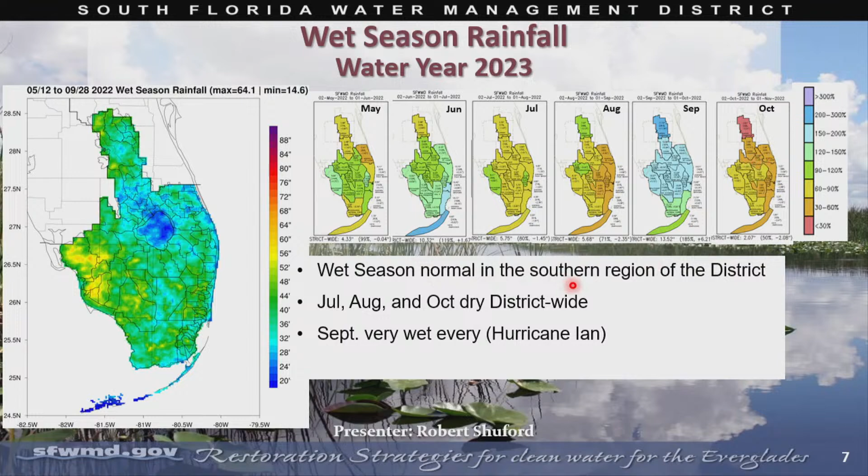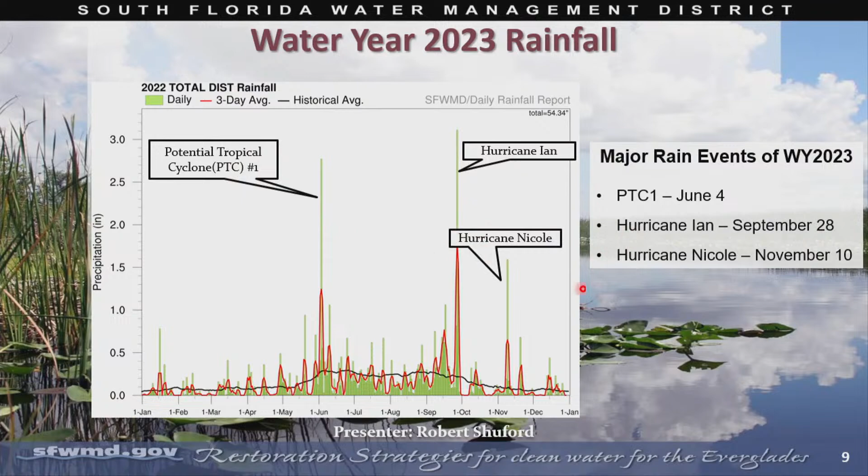All right, so we've seen the rainfall and talked a little bit about the storms. Let's look at how that actually impacts the system. The next 2 slides look at the marshes north of the EAA and south of the EAA. So we'll start with Lake Okeechobee. In this graph and the next, you'll see 3 boxes representing the dry season, wet season, and dry season of the period we're discussing.

As we start the dry season of 2022, Lake Okeechobee stage was near the intermediate band. Going into dry season, we have this gradual decline until right after the start of wet season. In other words, we had a late wet season that started around the 16th of May. The system responded a few weeks later with potential tropical cyclone 1. We got rains that gave us a little reversal, but it was a modest response that continued until September.

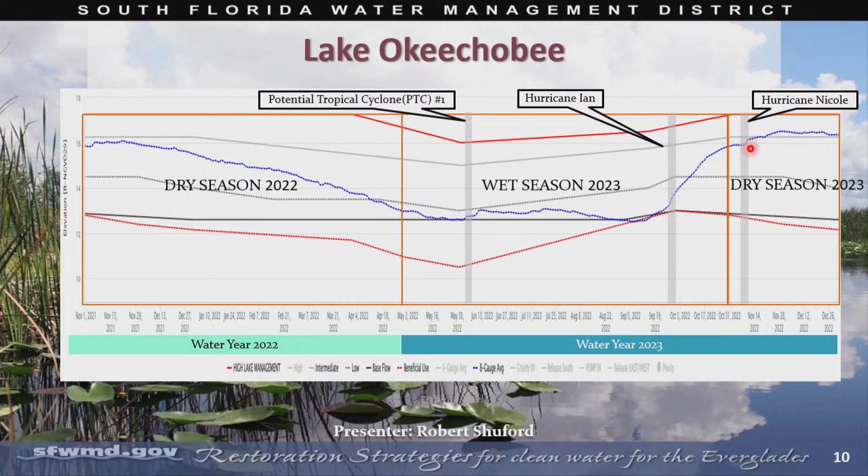Now, the EAA is bounded, like I said, on the north by Lake Okeechobee, south is 3A, but to the east are Conservation Area 1, which is the Loxahatchee National Wildlife Refuge, and Conservation Area 2A. So this slide, I'm not going to spend a lot of time on it, but it's basically just to show that there was a similar pattern. I didn't put the seasonal breakdown, but a similar pattern. We get rains, we get increases, and that's the story on this one.

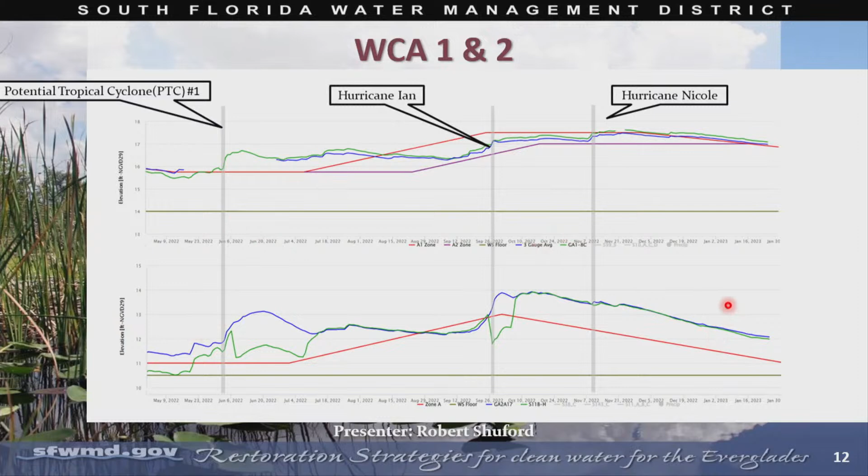All right, so we've looked at rain. We've kind of looked at how the system responds to the rain. Now we're going to look at seasonal inflows to the STAs. So here we have 3 seasons: dry season 22, wet season 23, and dry season 2023. The blue bars are runoff to the STAs, and the yellow bars are lake releases or regulatory releases to the STAs. And the rainfall is located at the bottom of the graph, and this represents basin rainfall for the region.

What we see is STAs received about 255,000 acre-feet of inflows during the dry season of 2022. That volume was partitioned into just under 210,000 acre-feet of runoff and about 47,000 acre-feet of lake releases. And this all is kind of a response in part to almost 10 inches of rain that was experienced in that dry season period.

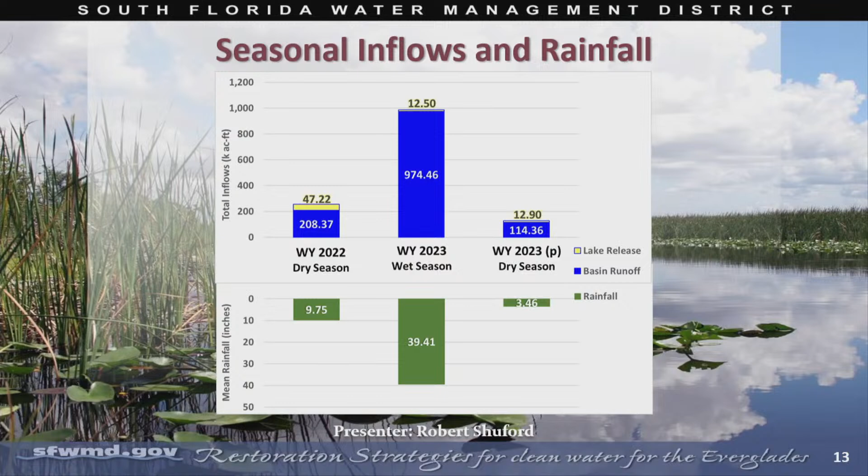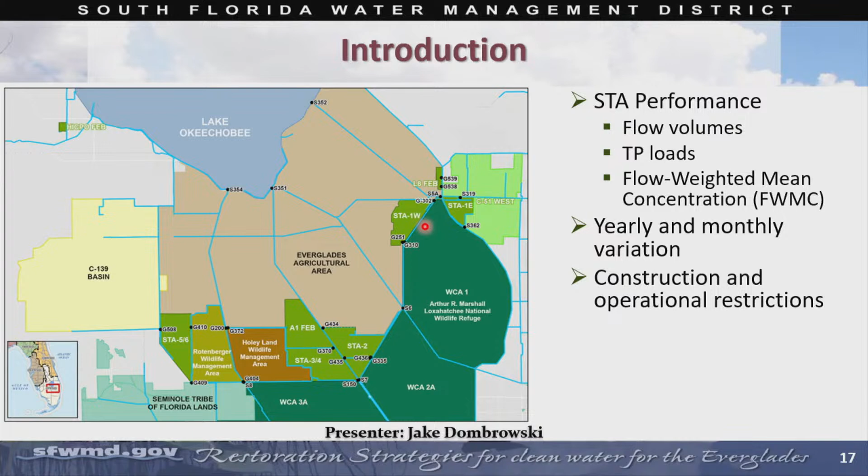So for performance, we're going to be looking at flow volumes, TP loads, and the flow weighted mean concentration. So I might just refer to concentration at a few points, but I'm always referring back to the flow weighted mean. So we're going to look at yearly and monthly variation, as well as construction and other operational restrictions.

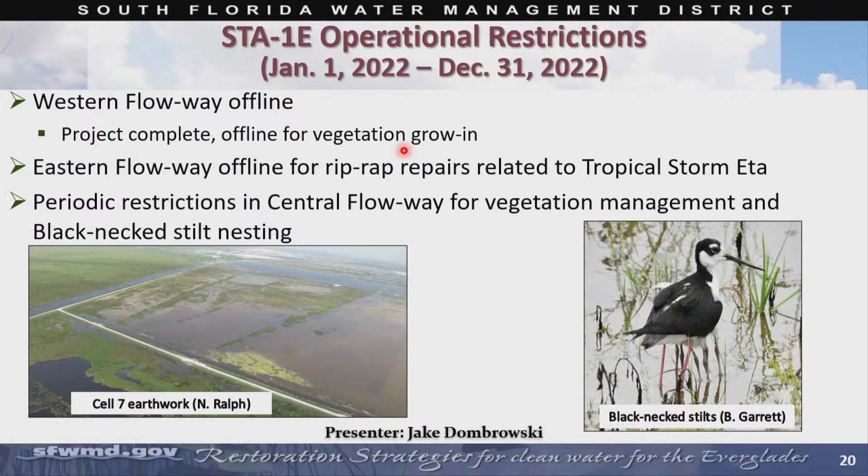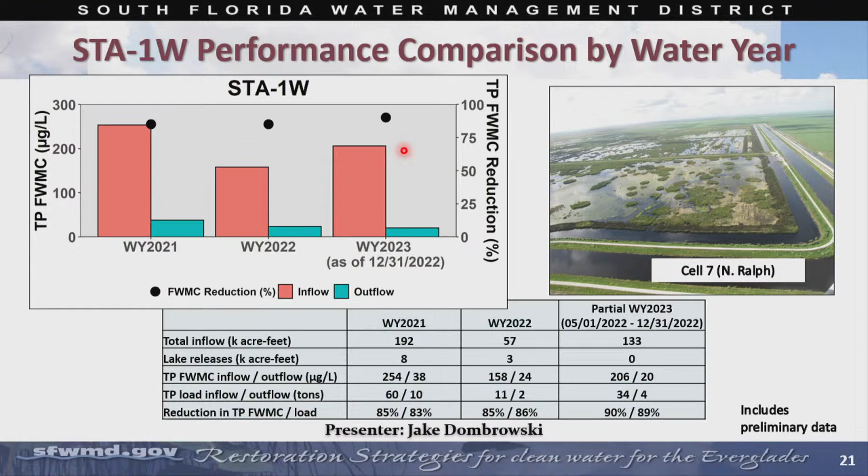Looking at the monthly trends, so far in water year 23, 1 West has received higher inflow volumes. This is related to a couple things. There's been a few refurbishment projects that have recently wrapped up in 1 West, improving its capacity to take flows. And then all the work ongoing in STA1 East has led to water being channeled towards 1 West instead.

One last thing to highlight here for the monthly trends is the outflow concentration in water year 23. It's been low and stable with minimal impact from the storm season, thanks to the L8 FEB.

For operational restrictions, 1 West, all the flowways were online this year. However, there were periodic restrictions in each of them. Those were refurbishment earthwork projects that occurred in the northern, western, and eastern flowways. These were primarily levee reconfigurations.

The photo on the bottom right here highlights this L-shaped open water area, which is where a levee used to be, and it's currently being revegetated, while the levee was moved elsewhere. There was also construction related to expansion number 2 in cell 8, and we had black-necked stilts nesting in the northern and eastern flowway.

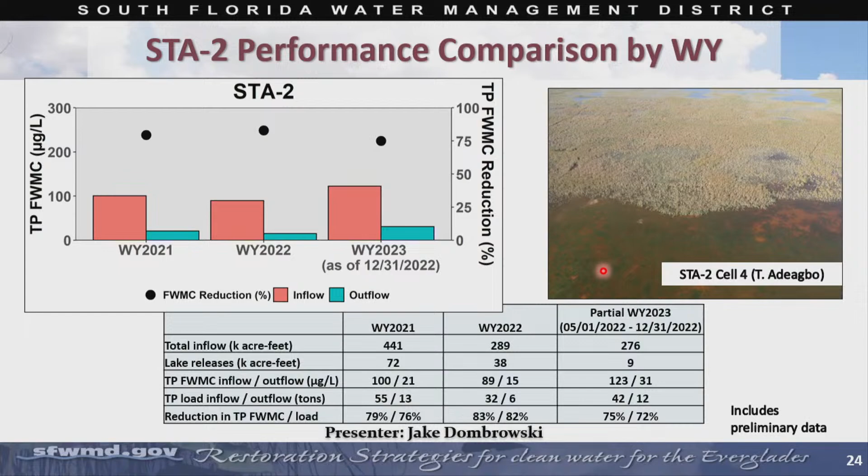For STA2, STA2 has had relatively similar inflow volumes compared to last year, or at least it's on track to be about the same as last year. The inflow concentrations and the outflow concentrations have been higher this year, especially for the inflows, and I'm going to touch on that in the upcoming slides. The percent reduction for STA2 has been down, while the amount of TP load retained within the STA has been relatively similar to past years.

Other thing to highlight here, the concentrations at the in and out. In 23, we've had these higher inflow concentrations, and then we've seen a slight uptick in the outflow concentration as well. And that's related to a couple of factors. I'm going to transition to the next slide.

This work that was going on in Flowway 2 required very low stages for the construction, which impacted Flowway 1. Flowway 1's directly adjacent, and a lot of the stages there were reduced while the construction was happening. This actually caused dry out for a number of months this past spring. So that combined effect of reduced capacity in Flowway 2 and dry out in Flowway 1 are likely big factors for the uptick in the outflow concentration.

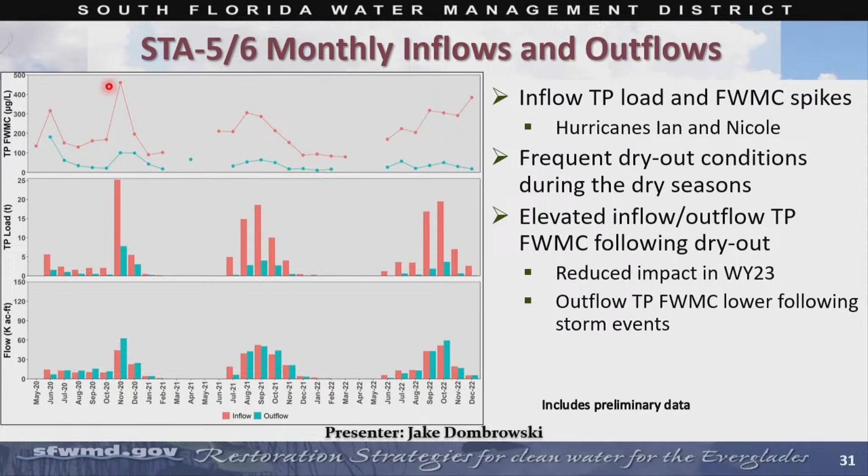In terms of operational restrictions, there really hasn't been much out in 5/6. Flowway 4 was offline for a portion of time for vegetation management. Otherwise, all other flowways were operational. So I wanted to highlight a few other things here. A number of years ago, we had some earthwork that was done in flowways 2 and 3 to improve some of the inflow treatment areas there.

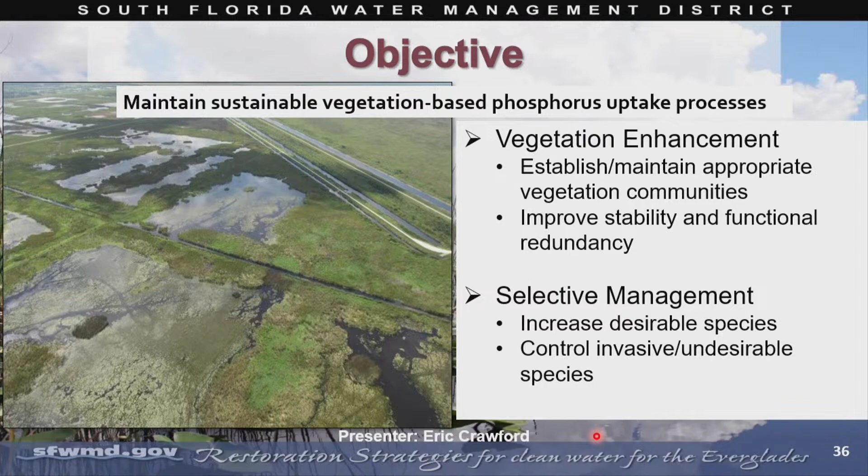So the function of the vegetation in the STAs, the first function of the emergent vegetation is to stabilize the soils. Without the vegetation there, the soils move, and we get erosion, and we just get immediate gullying and short circuiting. So stabilizing the soils, to us, is the first function. It's what has to happen before you can move into the rest.

So once we get the soil stabilized, then the plants serve to break up the flows, disperse the energy, which can cause a decrease in turbidity and increase sedimentation. We're dropping the particulates out, and those emergent plants are creating litter, and you get a lot of microbial litter and phosphorus uptake capability on the litter.

The submerged vegetation, most of the species provide little soil stability, but some do. Primarily, they provide a route of water column and phosphorus uptake. And they also provide a substrate for periphyton to grow on, which can do a lot of phosphorus uptake as well.

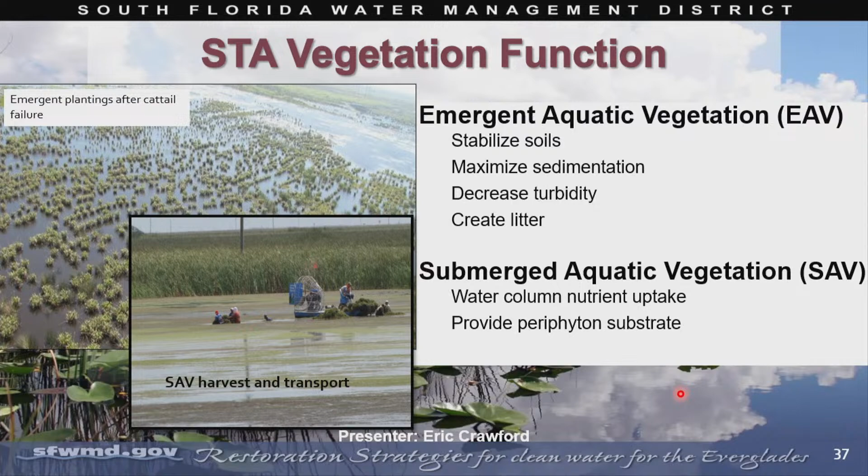So what we want is a cattail-dominated inflow cell. And to get good cattail domination, especially in a cell or a part of a cell with a lot of organic soils, you need the bulrush and the deeper rooted plants to stabilize the cattail. Cattail grows quickly, makes a lot of litter, it does its job really well.

Cattail is not stable, doesn't root deeply, and can have a lot of problems with water level fluctuations, with it separating from the soil. It's very buoyant. So we mix in deeper rooted plants. So when you see a cattail stand like that, even if you don't see the other plants, because they may be 2, 3, 5% of the total population, they're doing their job and helping to hold the cattail down.

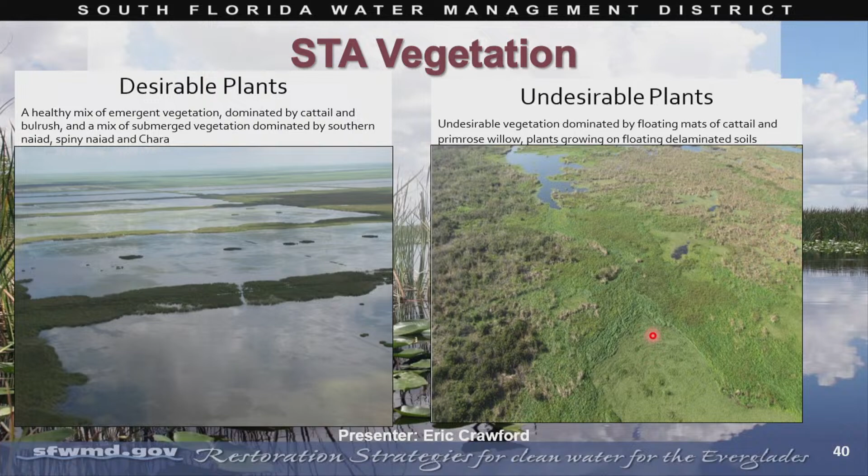And so the wind tends to be more powerful in the motion of these floating wetlands than the water flows do. So it's hard to predict where they're gonna go and how they're gonna move. So it's easier to remove them instead of try to stabilize them. But when we can stabilize them, we do, because removal is expensive, and then we have an empty zone. And then we have to plant the empty zone.

Planting looks like that. We have crews of 15 planters, and we'll typically have 2 alligator removal watchers with each crew, keeping them protected. And they spend a day harvesting plants. We grow our own plants, so we grow harvest sites. We pick species that we like. We pick communities that we like to grow differently. And so they'll spend a day harvesting and then a day planting. Most of our crews do about 5,000 plants a day.

And this area is the same area that I showed in the previous slide, with all the floating soils and the floating wetlands and the invasive plants. It's been cleaned out. We removed everything, sank all the materials, and then the crew is going in and planting. In this case, it's giant bulrush.

It's a really organic zone, and so we needed a deep rooting plant to go in and stabilize it. There's enough remnant, well-rooted, strong cattail in the area that hopefully once the bulrush stabilizes those soils, the cattail can recolonize.

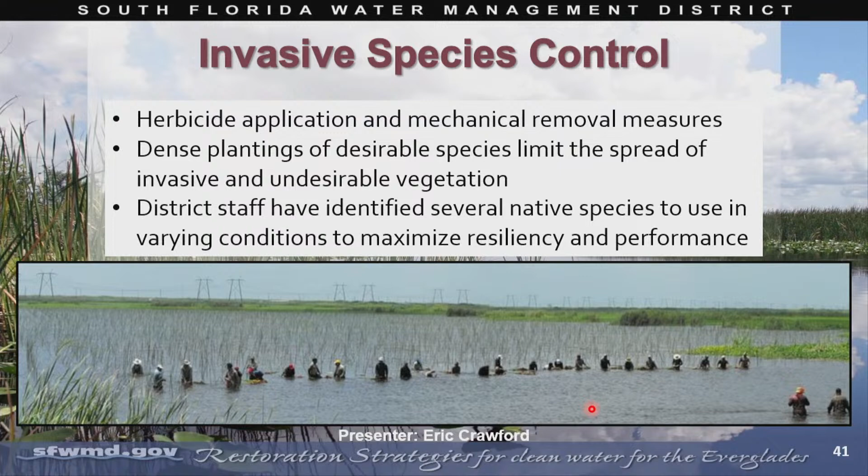Floating aquatic plants are a big problem, and when the floating veg moves in, it comes in on the water as we have our flows. So when you have a hurricane flow, you bring in a lot of floating invasive plants. When you have a projected hurricane or storm, we move in a lot of floating invasive plants. You don't have to have the storm to get the plants, because surrounding landowners and the farmers will drain their fields in anticipation of the storm, which causes a flow.

So we need to protect the plants in the STAs from these floating plants. When they move, especially in large rafts, they can come in 15, 20 to 100 acres at a time, and they're mobile. And when they go over the emergent plants, they can knock cattail down, and when they go over the submerged plants, they can uproot it, or they can just shade it out and kill it. So removing the mobile FAV is our biggest priority. It's what we spend the most of our time doing, chasing it, looking for it, and getting crews out after it.

In attempts to remediate the effects of the floating aquatic vegetation, we plant dense emergent strips in the inflow regions. Sometimes we can shape them based on the underlying geology, because the cells are not all flat and level. So we plant herbicide-resistant and strong, well-rooted, flow-resistant plants in the inflow areas, and they can hold back and capture some of that FAV and hold it till we can treat it. So it gives us a little buffer in time.

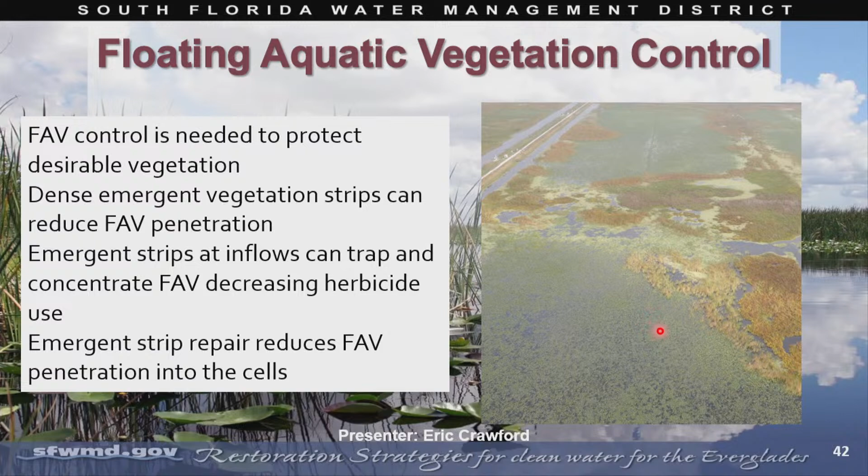So to be able to do these processes, we need to watch and monitor the health of the vegetation. Every cell gets inspected from the ground weekly and gets inspected from the air monthly. And typically we'll get a boat in it when something is seen, or we'll go out and walk it. Most of the emergent cells you can go out on foot and do inspections. We work with the water managers when we have areas where we see there's been a lot of erosion or channeling or flow, and when there has to be a planting done, they can help reduce flow rates so that we can get the plantings in and get them rooted and ready for flow again.

To proactively manage the vegetation, it typically just involves increasing the cover and health of the desired species. We tend to pick the weakest areas first, and the season decides the site, the soil, the species. Obviously in the dry season, we will work in deeper areas. Wet season, we'll work in shallower areas. Dry season, we work the inflow regions where there's going to be less flow impact on the new plants. And in the wet season, when flows are coming, we move downstream and plant in more protected areas. So we move around the crews as conditions allow.

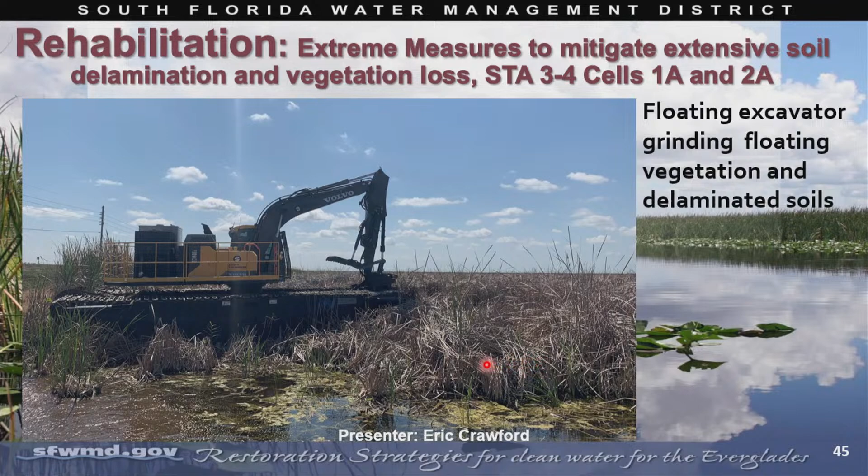So this is where we did that, and in 1A was the first time we had to do the extreme grinding. And I've got a little video here that'll show, you can see the dates up in the corner. So this is 2017. STA-3/4 has a number of short circuits cut in at each structure. This is a large slough that comes down. It's a little bit deeper area with a hard packed marl bottom with a thin layer of floating peat on it. And it flows all the way to the outflow here, and then it splits and does the same over here.

This is cell 2B, which is a beautiful, healthy, productive cell with great performance. But at one point in this project, we actually had the bright green here. I played with the imagery to make different species show, and in these settings, it makes the water lettuce and the floating vegetation really bright. And I'll just start the video now.

So you can see the progression. Maybe. Should go.

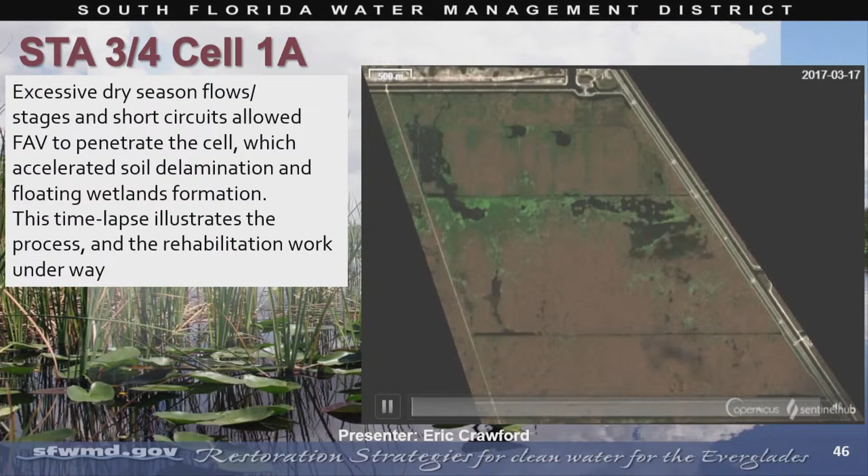All right, so in addition to rehabbing the emergent vegetation, we rehab the SAV. That's in some ways easier and in some ways harder. We have to go out into deeper areas. They're collected by hand and then stacked on an airboat, brought to the shore, loaded on a trailer, moved to the target cell. We'll do it within a single cell when possible.

But when a cell has had serious SAV losses, we try to bring in multiple species and multiple communities of the same species from different locations. And then we try to harvest from the most diverse areas to bring it in.

And when we see dense chara beds, the chara is a beautiful performer, but its senescence is not predictable. And when chara has been healthy for a long time and the beds die out, it's very difficult to get anything to grow in the soils in the floc that's left behind by a productive, healthy chara bed. We found some species that can grow in those conditions, and so we tend to inoculate them into healthy chara beds just to prepare for the next successional event.

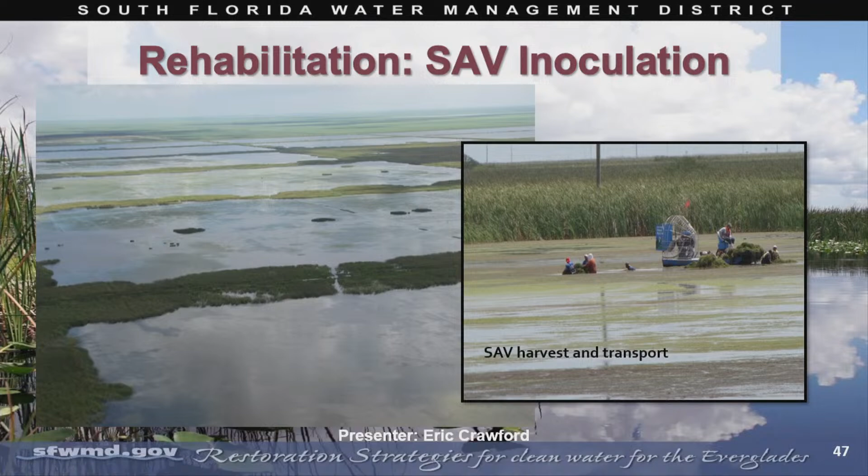So in addition to moving plants around and mixing species and adjusting the communities, we've found that SAV by itself is not very stable, and it's sensitive to a lot of environmental perturbations, to wind, to flows, and to wildlife. So we compartmentalize the SAV with emergent vegetation strips, and sometimes we mix emergent vegetation right in with the SAV.

That provides some stability. The roots of the emergent plants hold the SAV, distribute, stop the flows, and protect it from storm events. And when sized properly, a storm event can come over and the SAV will persist. Without the emergents, sometimes the SAV beds can roll over and they can get blown to the sides, and it takes a long time to recover from that. So we want to avoid that when possible by trying to manage the amount of EAV in the SAV beds or the size of the SAV beds.

This is STA-2, cell 3. Had a lot of SAV die-off, had a lot of issues with damage to SAV. The compartments were really large. They were really affected by wind and storm actions. So we had to go into cell 3, and we've planted, at this point, I think it's like 12 miles or 13 miles of emergent vegetation strips of giant bulrush, closed off a number of short circuits.

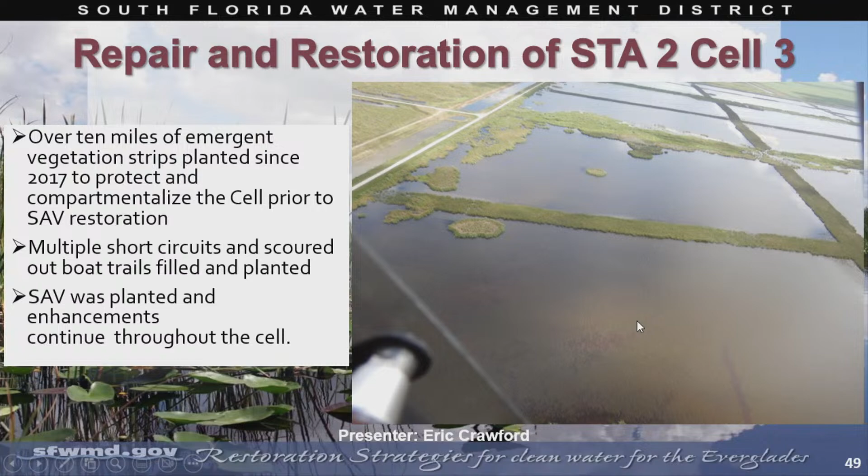One of the methods that we've come up with to keep our EAV plants healthy, especially when they have to be moved between cells, is as the plants are bundled and collected and harvested from our harvest sites, we wrap the root balls in SAV. So all emergent plantings are moved with an SAV planting as well. So hopefully that's not a lot, but it just takes a few plants to get going, really, to spread throughout the compartment.

And when you see the big white areas at the downstream end of a cell, that's not necessarily something bad. A lot of times that means the Chara was growing so well that it really topped out, and then we may have stage changes. Even in the wet season, the Chara can just fill up. If we have a storm event, stages come up a foot or so, the Chara will follow the water surface up, and then when the water goes back down to target, the top of the Chara gets bleached off.

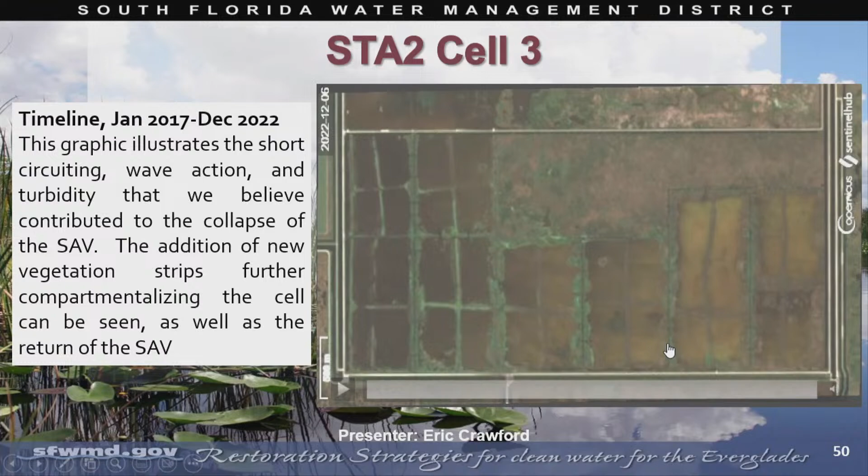And so a lot of times on the imagery, you'll see these white zones that look bad, but it's just a thin layer of dead Chara sitting on top of a nice bed, and they typically disappear by the next storm. And that'll wind it up.

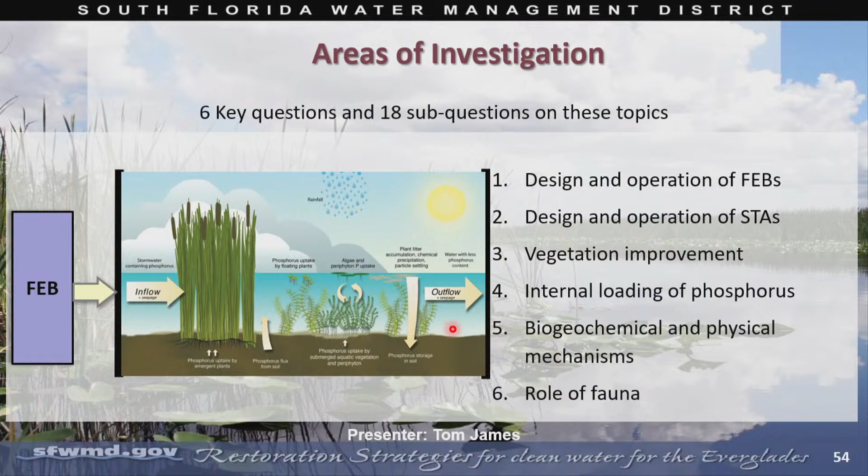And all we're trying to do is understand how the phosphorus is removed and retained within these areas, going to the design and operation of FEBs, STAs, how to improve the vegetation and to maintain it, and looking at the internal loadings from the soils into the water column, and also all the biogeochemical and physical mechanisms that retain the phosphorus within the soils and keep it from flowing out. And finally, the role of fauna, which has been an interesting aspect of this whole study.

So I'm not going into the completed studies to save some time. These have been presented in past years, but I do want to mention a couple of things. One is that the studies have long names, and because of that, development of operational guidance for flow equalization basin and STA regional operation, we call this the operation study. We have nicknames for them, so I'm going to be presenting the nicknames.

I do want to point out the PSTA study. This is a study where we took a 100-acre cell, we removed the muck from the bottom basically to lime rock, and it has been in place and operational for 15 years. And in those 15 years, the mean discharge of phosphorus has been less than or equal to 13 parts per billion, which reaches our mandated water quality effluent limits.

So again, there's some other studies. These are additional studies that were done recently, or studies completed. But I do want to mention the studies completed in the past year. We have the soil amendment, or soil management study, which had 2 aspects. One was to look at the potential for applying amendments to the soils, which, based on the literature review and estimates, is very expensive because of the broad areas of the STAs that would have to be amended. And there's uncertain effects downstream.

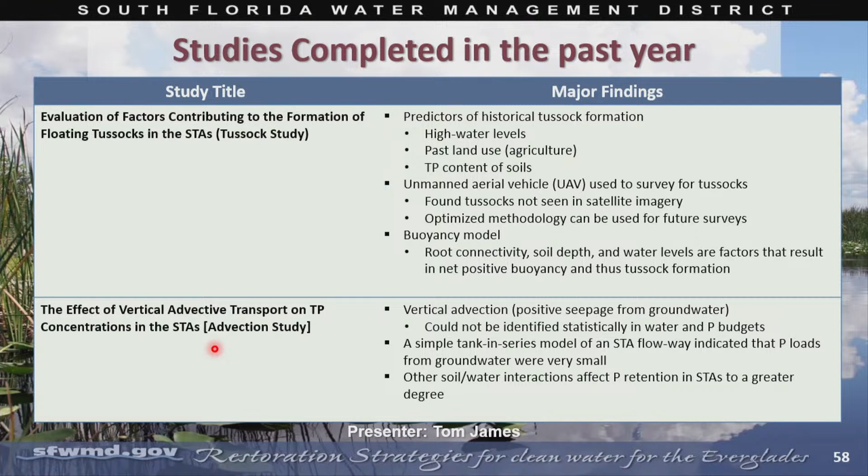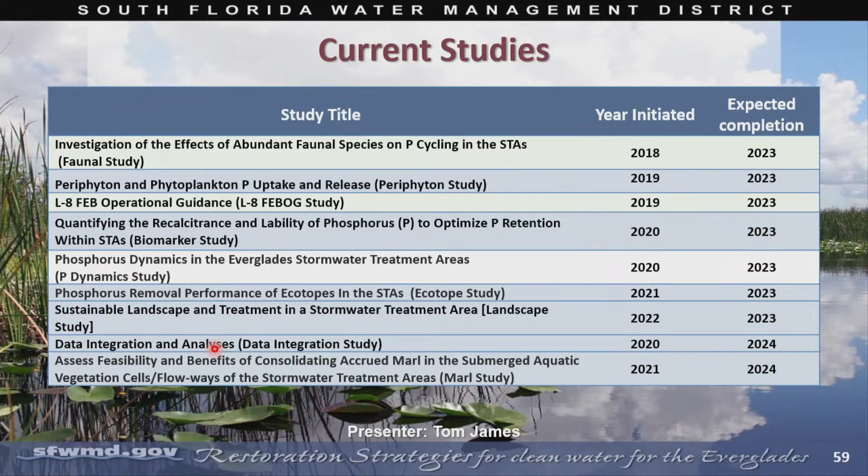So I wanted to real quickly go over the current studies that we have, these 9 studies, which is the bulk of this presentation. Because of time, I probably won't go through every aspect of them, but I will point out some of the highlights, either objectives, results, or status, or just talk about the pictures. And this one, I do want to talk about the picture.

In the fauna study, there are a couple of things that we do know. We've got a lot of fish, which was the focus of most of the study, and those fish can affect the phosphorus in the water column either through excretion or through bioturbation, where they stir up the soils. And we do know that the large fish are the ones that really stir up the soils. It's basically species specific, and there are certain species, such as the sailfin catfish, that are very good at stirring up soils.

And this particular photo shows these enclosures, which have 1, 2, or 0 fish. And you can see that there's quite a difference in the water quality when you have 1 fish, 2 fish, or no fish. And so we do know that they do have an effect.

However, because the small fish are at a greater density and they also produce a lot more excretion, they actually have more effect on the water quality in the STAs than the bioturbation from the larger fish, which tends to be very specific to particular areas. So we can fix the bioturbation essentially by selective fishing in different areas, I think, is one idea. But in terms of the small fish, well, we'll have to figure that out.

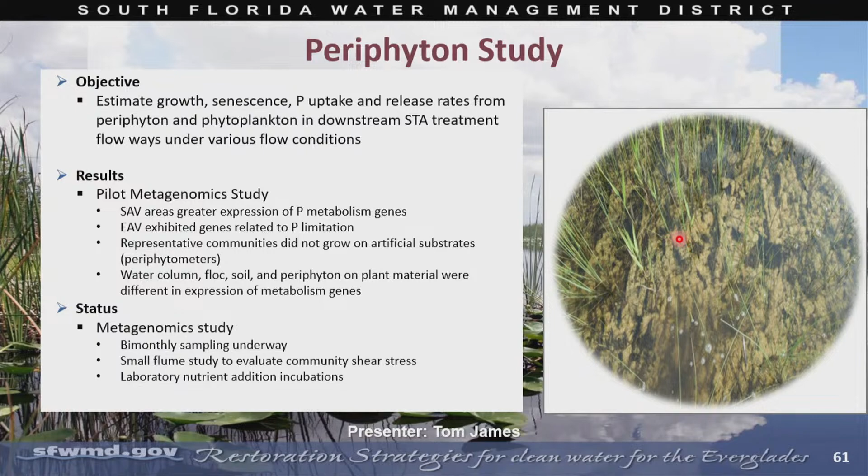In water year 2018 in the L8 FEB, the discharge concentration of phosphorus was greater than what came in. So this started this particular study, which was to ask the question, where is that phosphorus coming from? So first of all, we looked at groundwater and we looked at runoff, and neither of those had significant impact. Then we looked at the large inflows that do occur because, again, this is what the FEBs do. They take in large inflows to essentially reduce the impact on the STAs during storms.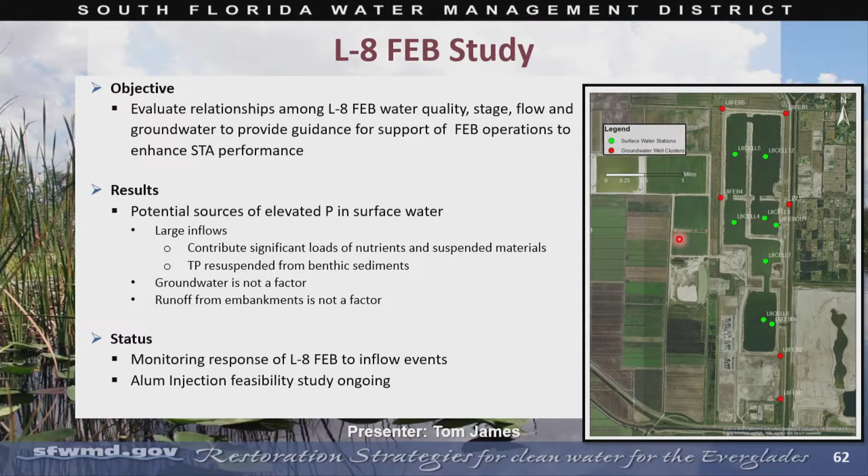And we did find that those loads contribute a significant amount of phosphorus into the L8 FEB, but they also stir up a lot of the sediments, creating a fair amount of phosphorus and turbidity. However, this turbidity over a couple of weeks essentially settles out and the phosphorus decreases. So the operation of the L8, which is typical, is you pull in a lot of water, you store it for a while before you let it go out, and that will reduce the phosphorus concentration going out. And since 2018, we haven't seen that concern of higher phosphorus concentration in the outflow than the inflow.

So the biomarker study, this is actually an interesting study, similar in ways to the metagenomic study, in that they're trying to identify the different organic markers that can show them where's all this material, how's it being used up, and where's it going and coming from. And they actually did a study where they took some of the vegetation and created these small litter bags, kind of like tea bags. And they're looking at the degradation of that material, and at different times during the experiment, they would put this into water and see what they could extract in terms of the organic materials. And that's one of the ongoing things with this particular study.

What they did also show, they looked at the inflow of the waters, the organics, and found that one very important aspect that had not been looked at very closely is the effect of photodegradation, in other words, sunlight, in that the organic material coming in is being degraded into smaller organic materials, most of that being in the dissolved form, that can then be mineralized or uptaken by the periphyton. And again, that's kind of an interesting story in that we do have large areas where the water is fairly visible, especially in the SAV regions, and that material is getting degraded by sunlight. So interesting set of studies.

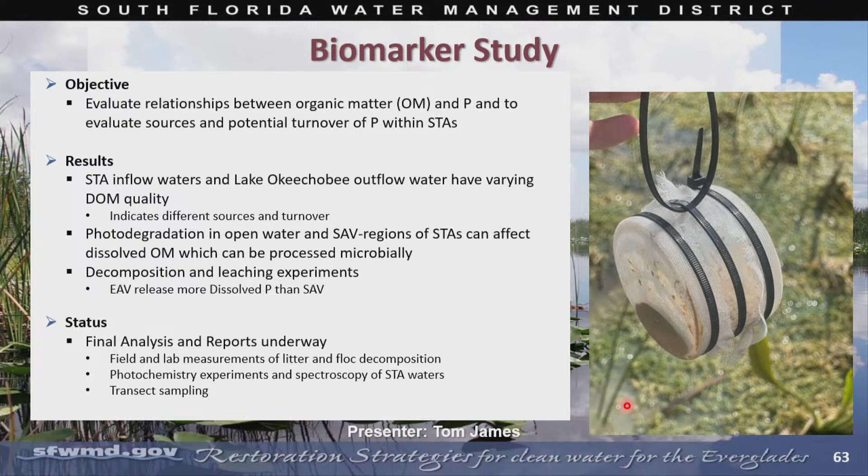This particular study is about completed. We've still got a few analyses to do, and there will be a final report, of course.

The P-dynamic study, this one is looking at the different flowways that are underperforming and comparing those to flowways that are well performing, using methods that were developed in the PFlux study that was reported a number of years ago. And right now we're kind of in the middle of this, but what I wanted to point out was they did a historical analysis, which is very important, and found the underperformance basically was related to all of the disturbances that occur in the STAs: dry out, reflood events, lost and damaged vegetation, construction activities, and high phosphorus loading rates.

That's the bulk of where we are getting the underperformance, at least in terms of the historical data. And now they're looking at these particular sets, looking at essentially no flow or low flow and high flow conditions in both the wet and dry season.

And in these flowing conditions, they do see some things that are very consistent with a lot of what we have already learned, in that in the water column under no flow conditions, you have a lot of particulate phosphorus. You also have higher concentration of phosphorus during no-flow conditions than during flow conditions. And we also see that the TP patterns are primarily dictated by what's coming in the inflow in terms of SRP, which is your soluble reactive phosphorus.

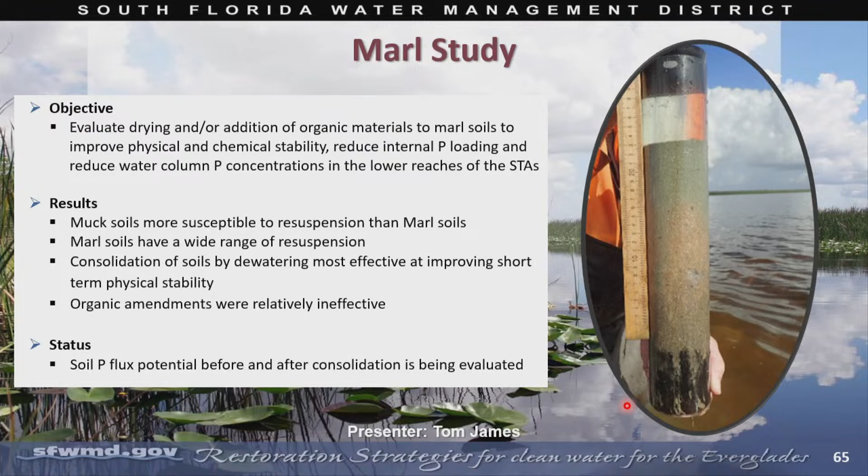One of the things that we haven't looked at is the different plant communities and how well they remove phosphorus compared to one another. We've had a lot of information and some thoughts in this, and we know what the major communities are. What we wanted to do is go out in areas and look at the phosphorus concentrations in different ecotopes or communities. This included mixed Chara, Naiad, Typha, and bare soils.

So a couple of the interesting things, again, that we've seen in other aspects of this research are that increased outflow and water depth reduce the phosphorus concentration. This probably is occurring because you're getting better mixing of the water throughout the STA area. So you're getting the advantages of certain areas that are really soaking up the phosphorus for us and pulling down the phosphorus overall. And we continue this sampling through next year.

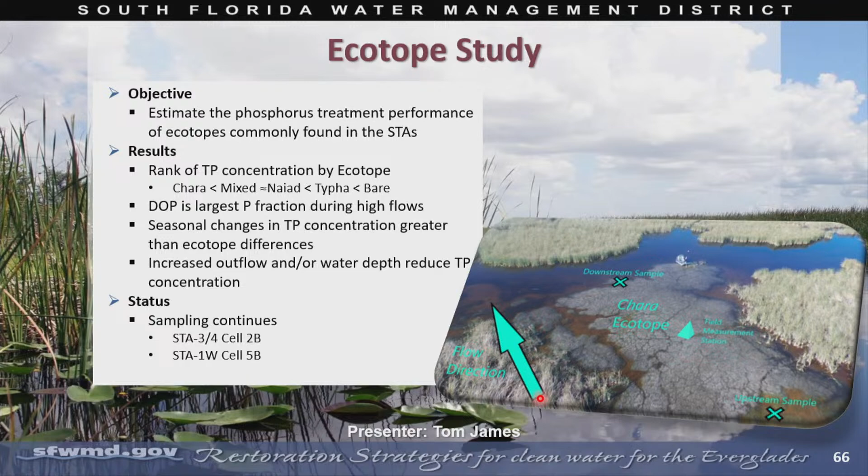So another aspect that we're trying to work toward is looking at the effect of flow on mixing. And this is where this landscape study comes into effect. We've developed these long flumes to provide a little bit more control of all the different environmental factors so that we get some really good results. We built these two flumes. One is a straight flume and one is a V-shaped flume.

And this V-shaped flume is actually of interest because we put water in at the top, and as it moves down due to the force of the water coming through, it slows down because you're getting larger and larger areas. That will give us an idea of flows versus mixing. And we'll add some plants in here, hopefully at different densities and different water levels, to see how that mixing occurs.

The idea is to provide some more information for operations on how best to operate the flows and discharge to the STAs to get us optimal mixing of the material and hopefully optimal phosphorus retention.

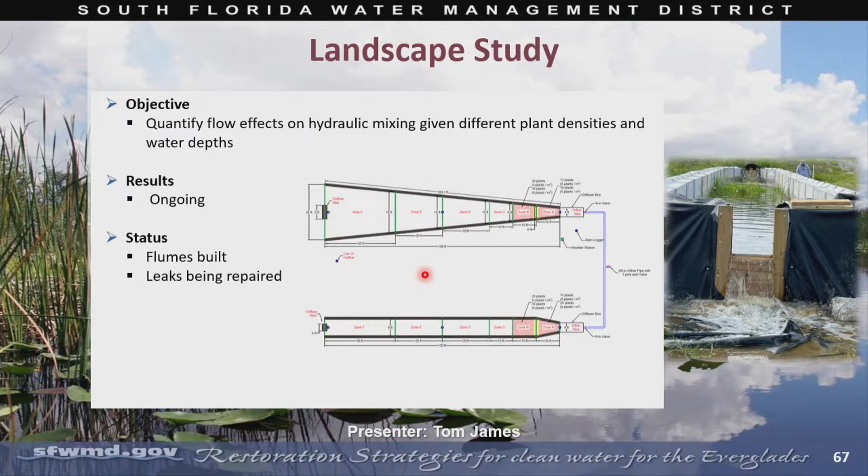So how do we pull this all together? This is my study, the data integration study, and we're trying to develop a comprehensive description of the phosphorus dynamics and also provide some information to provide a guidance document for the managers and, again, for people like Eric, who needs to go out and make decisions on what to do out there in the different flowways.

So we've done a lot of reviews of materials, both the data and the literature, and we're actually currently working on biogeochemical models. In this case, these models give us a sense of what's going on there. I hesitate to say they're predictive. We'll have some predictive ability, but I look at it more in terms of what they suggest are the more important flows and fluxes throughout the system that we should really focus on. And this will help us to move forward and hopefully give us some better information on what things we can do in these particular STAs.

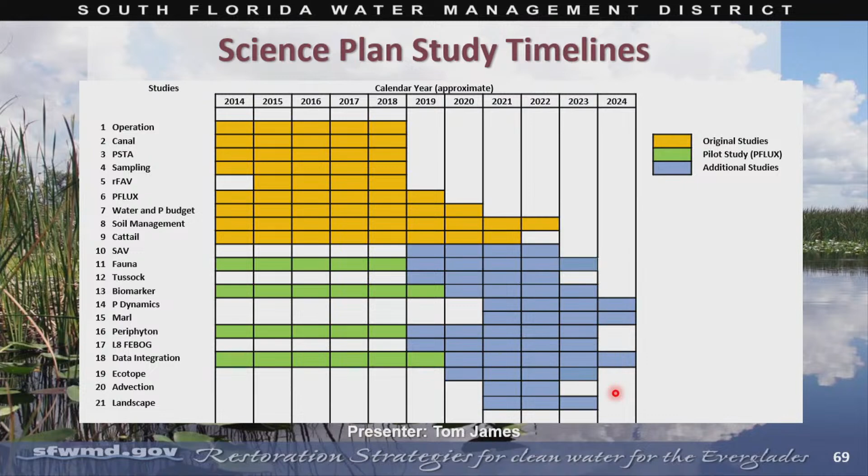Thank you so much. Thank you so much, Tom. That was a good overview. And you were actually not far off of the mark. You did very well in getting all that done.

This next presentation is done by Ms. Lucine Dadrian. She's the project manager and the section administrator in the Engineering and Construction Bureau. And her presentation will deal with restoration strategies in engineering and construction. Thank you.

So good morning. Always great to come to this long-term meeting to provide updates on where we're at. The staff works very hard to get these projects to fruition. So as you can see, this is the main graphic that we have. And we are working through these projects, and the status includes the last 3 projects in construction, including the expansion number 2 of One West, the last segment of the Bolles Canal G341 conveyance improvements, as well as C139 FEB. So we have a project in each flowway, east, west, and central.

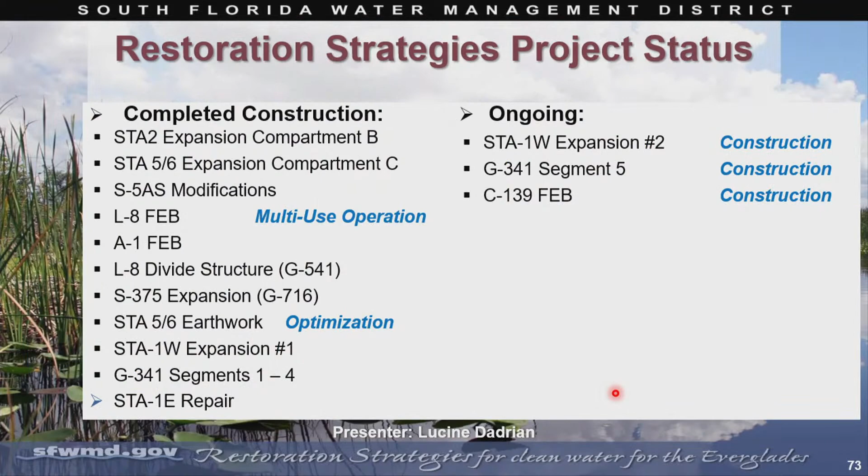So the first project that I'll provide an update on is expansion number 2. This is a 1,600 acre STA. It connects the STA One West through a conveyance channel and goes south, discharging to the south. So this is a very large project, over $214 million. It takes the inflows from 5A and C51 West into STA 1 West and outflow to Conservation Area 1.

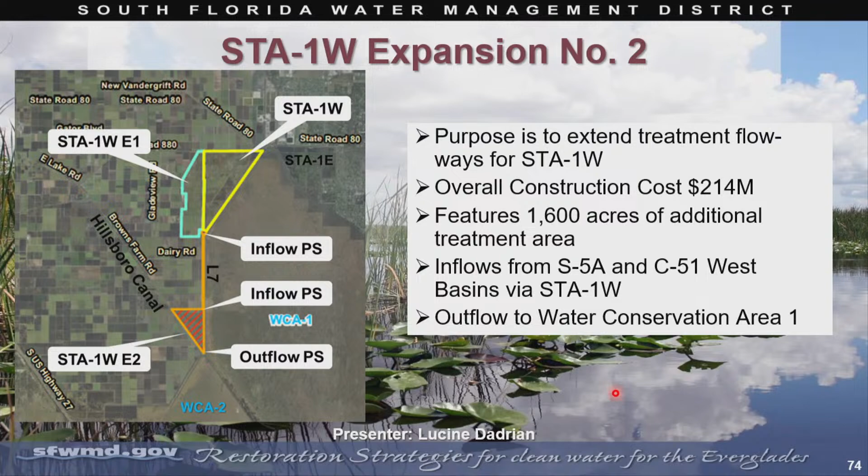So previously we completed the underground piping that connects the 1 West to the inflow pump station. The STA and connector canal is one contract and it is 90% complete. The inflow pump stations are 60%, as well as the outflow pump station. Here are some pictures of the north inflow canal and levee on the left, and the northern section of the concrete conveyance canal to the right, just south of G310. I got that wrong at first, south of G310, sorry.

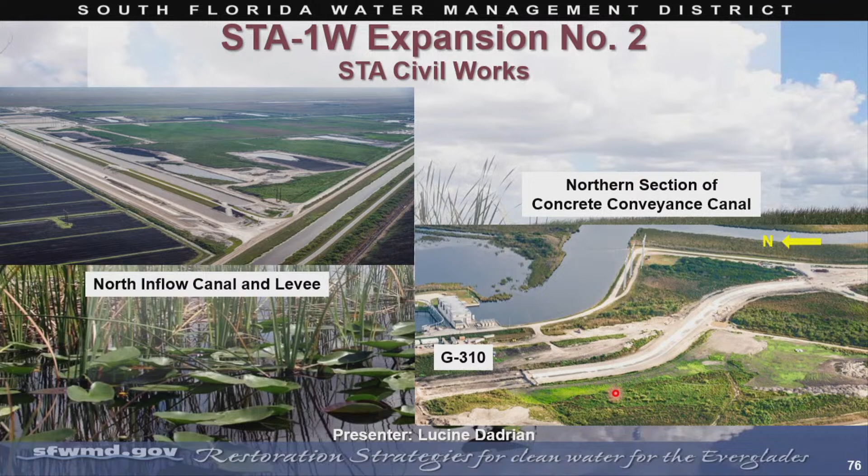All right, here are some pictures. These are interesting pictures of the inflow pump stations. Like I said, G780 is at the top end, connecting 1 West to the concrete lined canal. Previously, if you can see the red cursor, we did the underground piping to connect to the concrete channel. And on the right is the inflow channel from the downstream end of the concrete channel going into the STA.

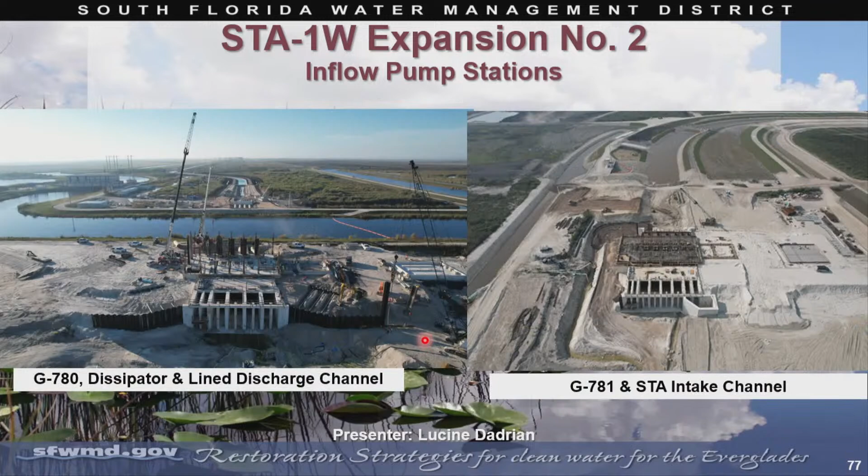And that project was awarded around 76 million. And this next one, the outflow, also was around 38 million. It lifts the water from the outflow canal and delivers it to the Water Conservation Area 1. You can see on the left the pipe gallery that is being laid out for the concrete pour. And then on the right is more of an aerial overview where the L15 is to the left.

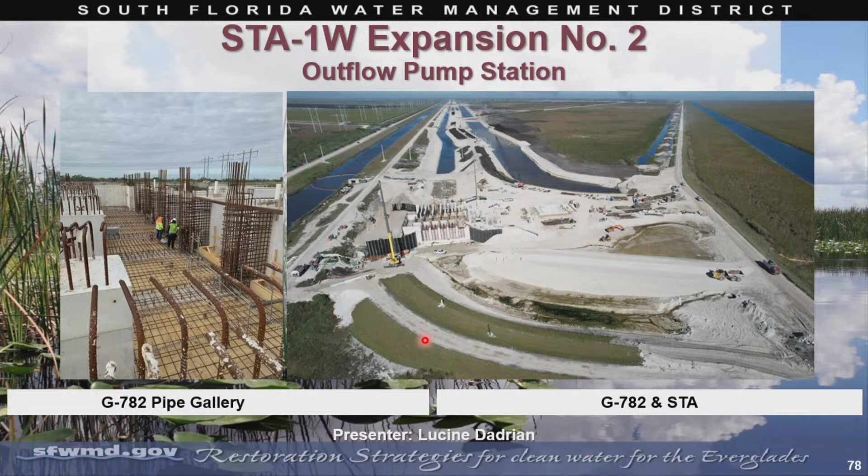So moving on to the central flowway, we have the G341 related conveyance improvements that we call Bolles East Canal that goes from the Hillsboro to the North New River. We've completed 4 segments made up of a lot of work. So the last segment, segment 5, is over 1 mile and includes 2 bridges, the Star Farms Bridge as well as Kennedy Farms Bridge.

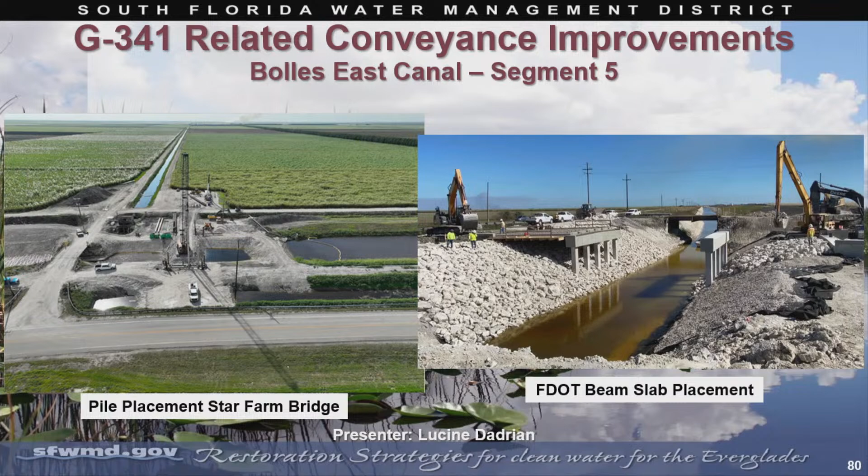And both pictures are of the Star Farm Bridge. We're placing the piles on the left, and then you can see the beam slab placement on the right, as well as the canal. You can already see that it's been widened for the cross-section required for the full canal. Here's another aerial overview of the widened areas where we have the ditch to the left and the canal in the middle.

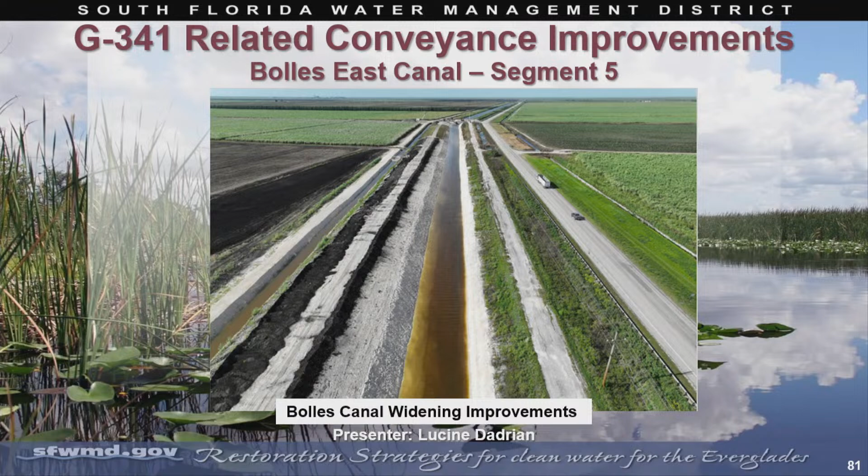Moving on to the Western Basin, we have the C-139 FEB, located south of the Deer Fence and to the west of L3. This project overall is about 73% complete. The pump station is around 49%, and G551, which is the outflow, is about 100% complete with its concrete work.

We have a lot of land leveling in this project, and that's about 86% complete. Levee construction, 74%, and canal construction, around 90%. We are on target to meet substantial completion in July of this year, and we had a 60-day contract extension for a change order that expands the southeast levee and adds another 1,000 acre-feet of storage.

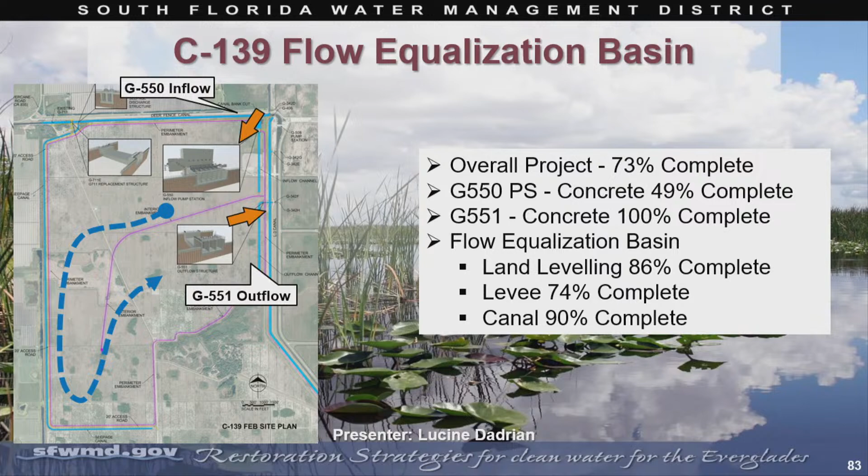So not sure if this is going to work, but this is an aerial video. It looks small on a slide, but it's pretty big in regards to what we're actually building out there. So I thought this was a neat view of what's happening. Now we're looking north, that's Deer Fence. That's northeast where the pump station is, the outflow.

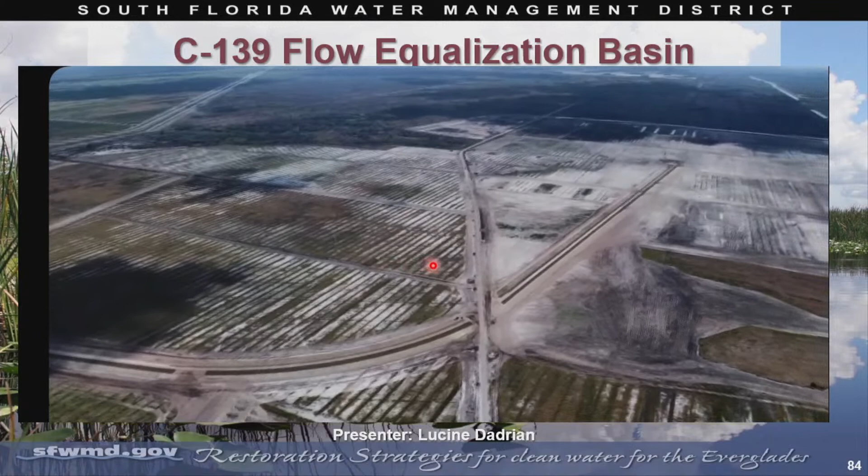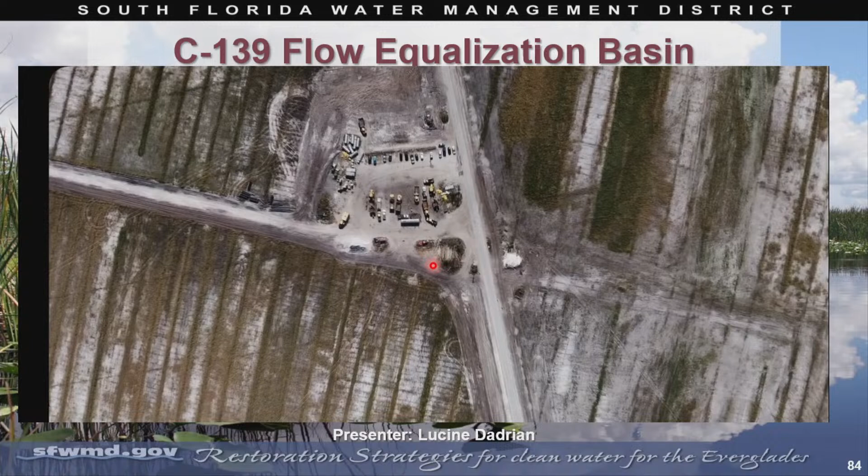And that's the training berm. And if I got something wrong, I'm sorry. Close enough. But really neat to be able to see. This is just a Google Earth fly-in and shows you how much work has happened to date.

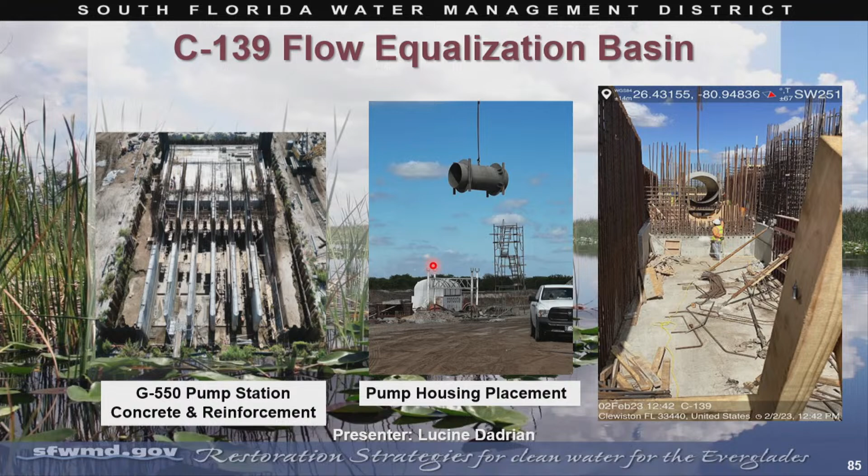So again, some pictures. This is the pump station on the left and the pump housing being installed, and then the rebar around it, and concrete will be poured in place. So this is the outflow structure. I mentioned the concrete was 100% complete. We are still doing the backfill of the levee construction to tie it into the levee. Pretty close.

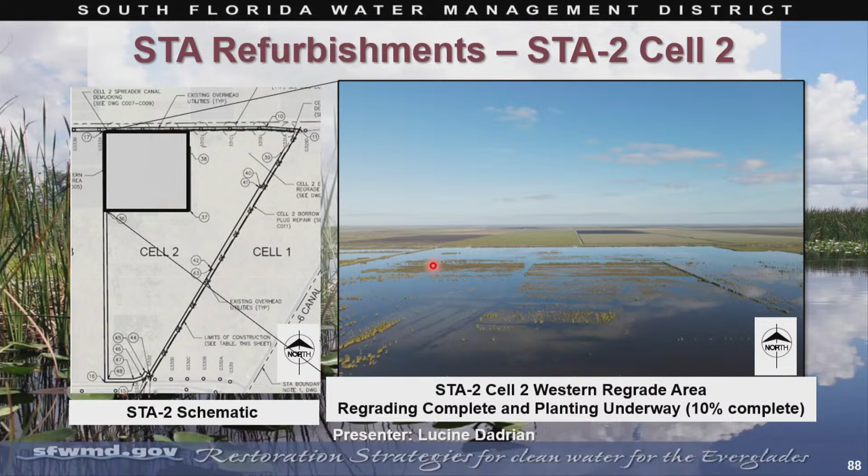And then the larger box on the left, again, that regrading is complete and planting is underway, and we're about 10% completion on that. So in addition to the regrading, there were cell plugs as part of the contract. There were 37. The contractor completed 15. 22 plugs were removed from this contract.

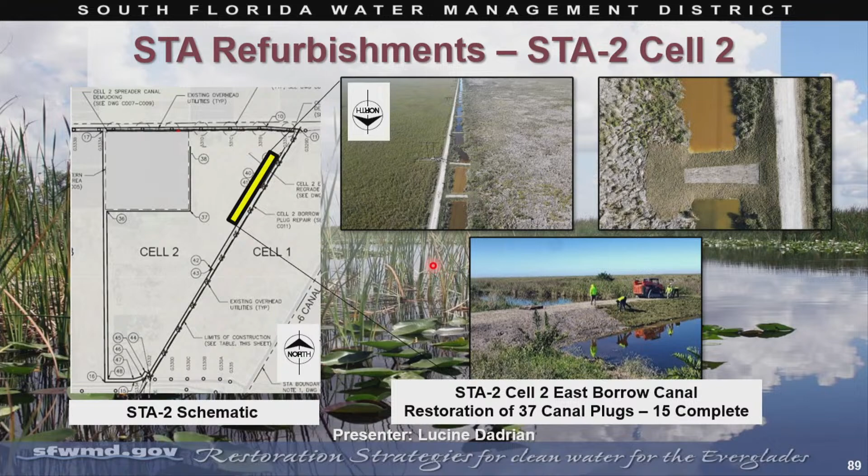We are looking for support from the field station. Our great construction crew through the field station will be building plugs in cell 3 as well as in cell 2. In cell 3, they're reconstructing 49 plugs, and then in cell 2, they'll do 11 of the remaining 22 in the appropriate locations to not see an impact.

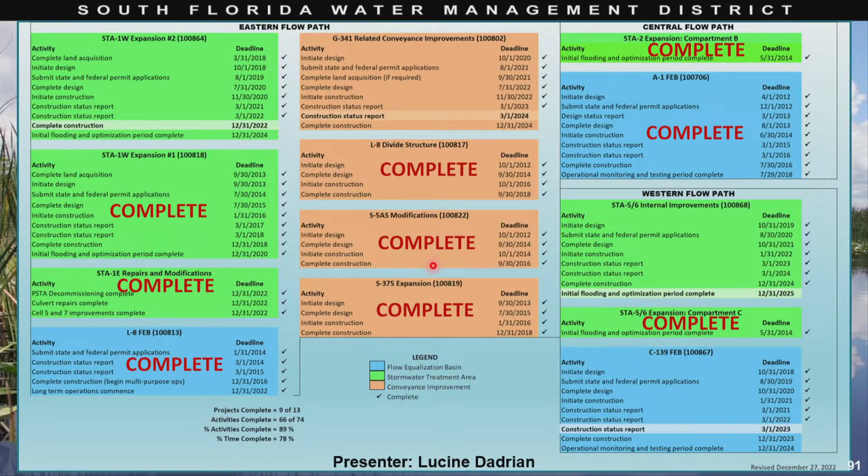So we see a lot of work has been done. And like I said at the beginning, we're rapidly coming to a close on restoration strategies, the construction aspects. This next presentation is going to address some of the nutrient source control programs. We have Yachao Wang and Steve Sarley, who are going to present on South Florida Water Management Southern Everglades. It's a nutrient source control program update, and I welcome you, Dr. Wang.

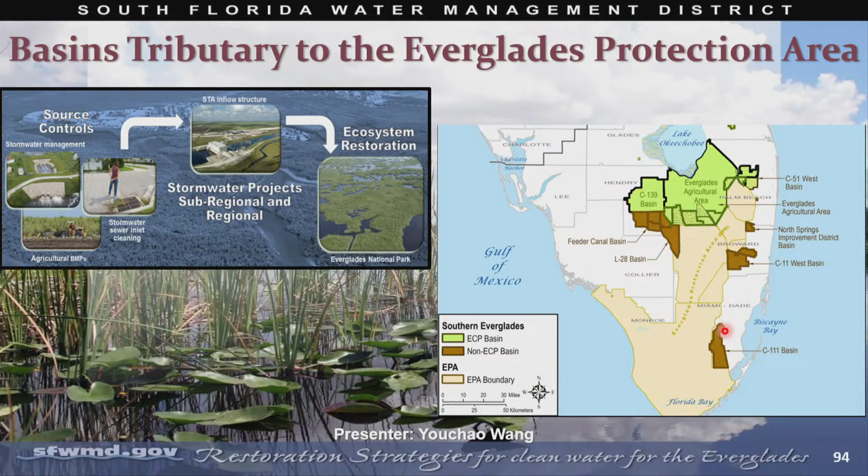This map shows the tributary basins to the Everglades. So the green area, the EAA and the C-139 basin, discharge to the stormwater treatment areas, and all the brown area can discharge to the Everglades directly.

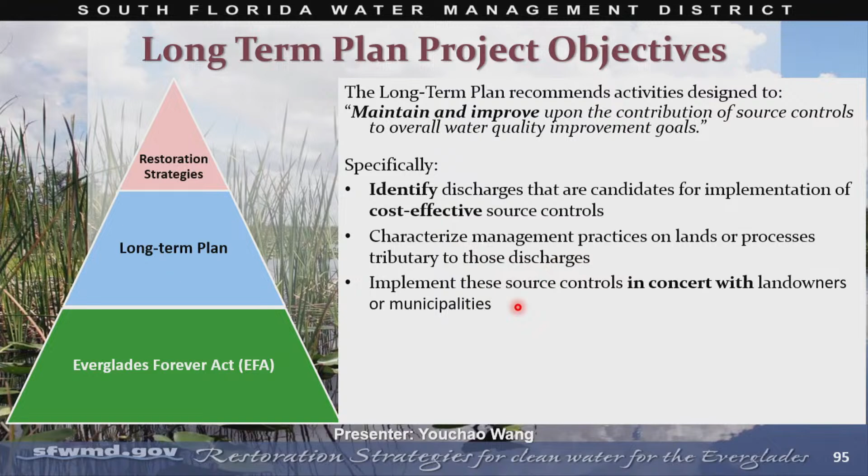Today's update will describe the source control activities in the EAA and C-139 basins, shown in the map here, where the source controls are implemented under the mandatory Chapter 40E-63. And for the other tributary basins shown in the brown area, source controls are implemented with the combination of source control and cooperative effort, and ultimately rely on the completion of the Comprehensive Everglades Restoration Plan or sub-projects.

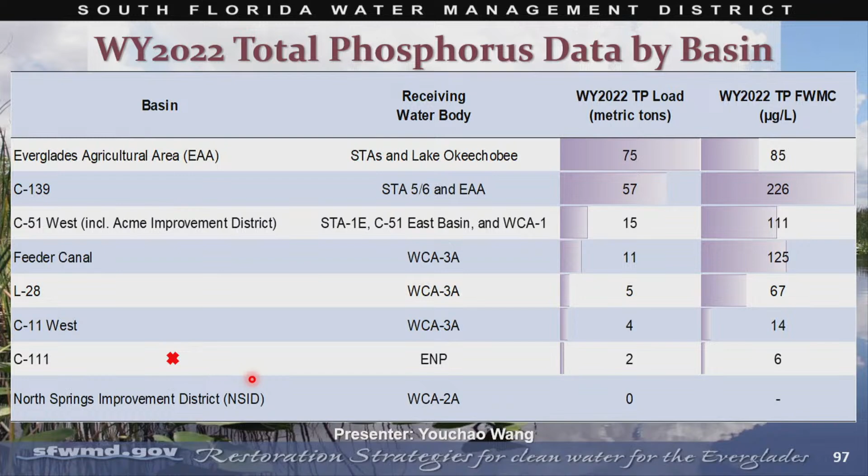So as shown in the previous table, the EAA basin is the largest tributary basin to the Everglades. The source control program for the EAA basin includes elements for the basin as a whole, the basin water quality compliance, and also for each permittee, which we call farm-level compliance, research and demonstration projects, and also the sub-regional source control projects, primarily in the S-5A sub-basin. We will provide more detail in the next four slides.

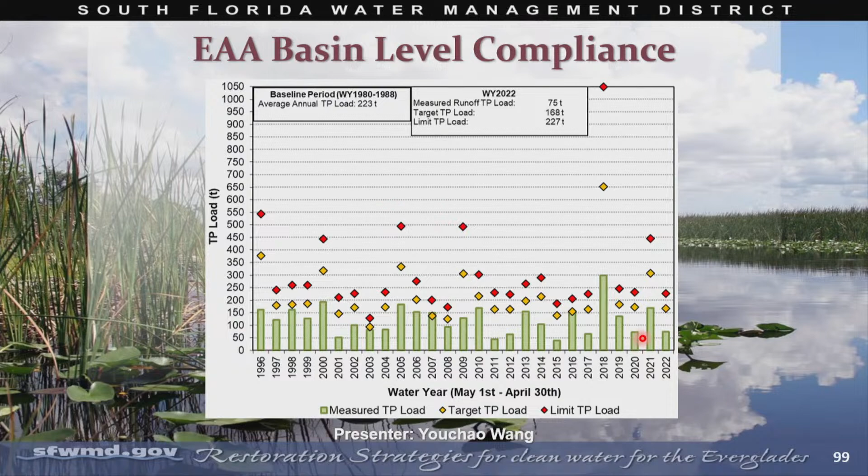The EAA basin annual compliance method is to compare the measured TP load with the target and the limit. If the bar is below the target, the basin is in compliance. If the bar is above the target for 3 consecutive years or above the limit for any single year, the basin is out of compliance. So far, the basin has been in compliance since the program started in 1996, with a long-term TP load reduction of 57%, and for water year 2022, the TP load reduction is 66%.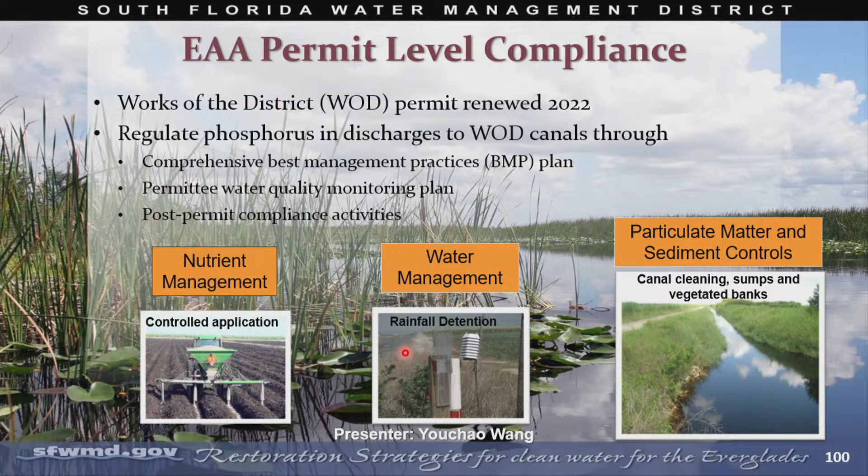This research is a 5-year project. Each year there is an interim annual report. The second interim annual report was completed in July 2022. At the end of the project, there will be a final report with more detail.

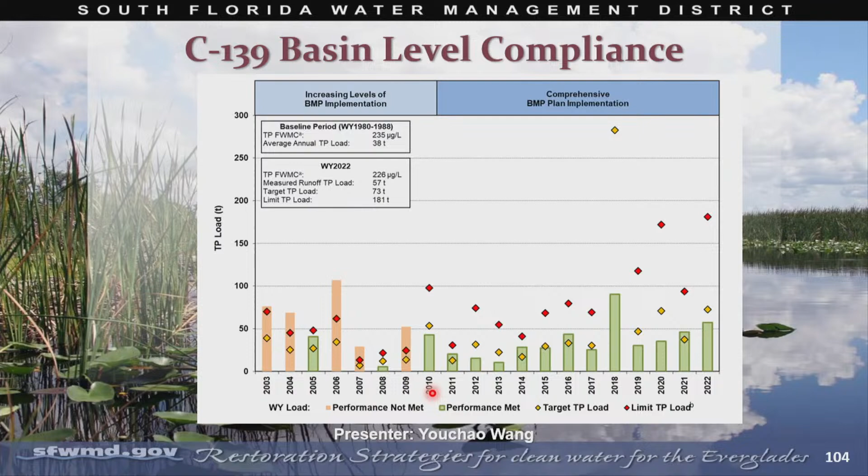So as we can see, the C-139 basin is also in compliance since 2010, for the last 13 years. Now I completed the update for the EAA and the C-139 basins, and my colleague Steve will continue to provide the update for the other tributary basins. Thank you.

Thank you, Youchao. I'm going to cover 5 other basins that are tributary to the Everglades system. They either do discharge directly to the Everglades system or have the potential to. And I'm going to begin with what we're now calling the C51 West and ACME Basin. And for our purposes today, I'd like to really concentrate on the ACME Basin, which was addressed in the long-term plan back when it was written.

The ACME Basin is the southern portion that you see here of this C51 West and ACME Basin discussion. And I'm going to look at this as essentially a tale of 2 ACMEs, if you will, borrowing from Charles Dickens, for a couple different reasons. The first reason is that we subdivide the ACME Basin into 2 major subbasins, ACME Basin A, which is located north of Pierson Road. Pierson Road runs pretty much directly east-west through the village of Wellington. ACME is the water control district for the village of Wellington.

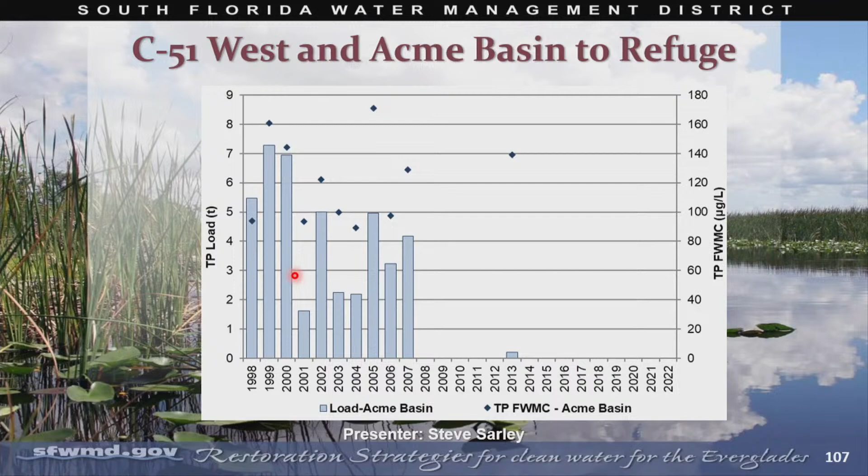So this is current from 2008 onward. These are discharges from the C-51 West Canal into STA-1 East. So we see our loads are a bit higher than what was formerly discharged into the refuge, but we have to take into account that these discharges include all those areas to the north.

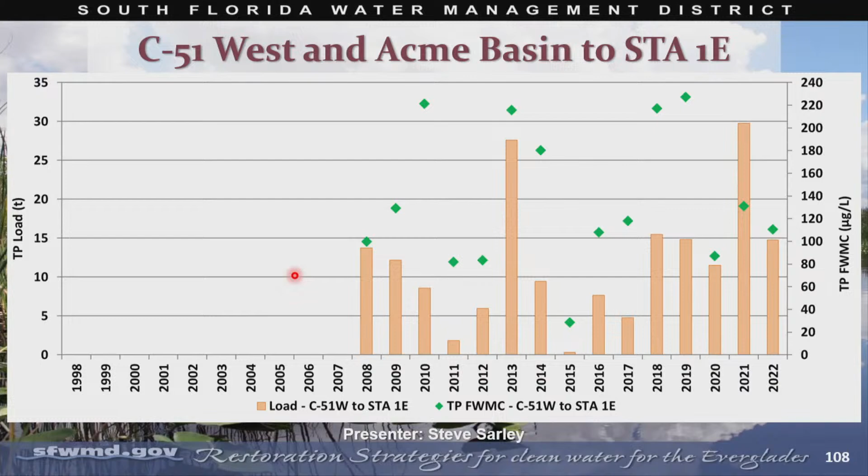And this is treated in the STA, whereas previously Acme Basin B's discharges, as I said, were discharged untreated into the refuge. So that was the completion of the diversion project back 15, 16 years ago now. So we're in a much better position as far as that goes.

The next basin I'm going to look at is the Feeder Canal Basin. This is a western basin. This is an agricultural basin. Once again, we divide this whole basin into two subbasins. The North Feeder Subbasin, which is on the east side of this figure.

We have a few landowners in the North Feeder. They're required through their environmental resource permits to implement best management practices and water quality monitoring. Also, there's two voluntary FAV tilling projects ongoing in that basin. And then to the west of North Feeder is the West Feeder Subbasin, about 32 landowners in this basin. And they're encouraged to enroll in the FDACS voluntary program for BMPs.

For this basin, the long-term plan relied on the completion of the CERP Big Cypress L-28 interceptor modification, which has essentially been incorporated into the Western Everglades Restoration Project. So this basin is one of two basins that rely on completion of WERP.

In this figure, we see the concentrations discharged from the Feeder Canal Basin through the S-190 structure. This includes all the discharges from the North Feeder as well as the West Feeder combined. So we see here that in water year 2022, we were at about 125 parts per billion. So that's the Feeder Canal Basin as a whole.

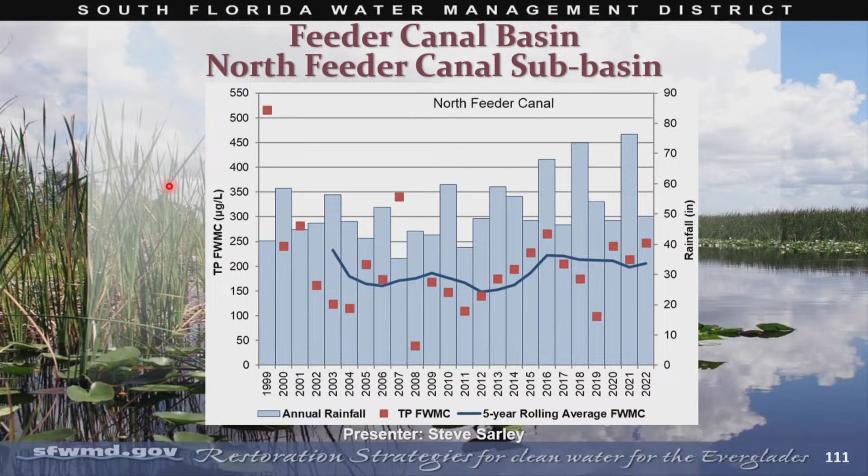So we see here that the North Feeder, in water year 2022, contributed about 250 parts per billion. So you can see this has historically, not just in water year 2022, been the more problematic of those two subbasins.

Next basin we're going to look at is located a little bit to the east and kind of south of the feeder. It's another ag basin, agricultural basin, L-28 basin. Within this basin, we have one landowner in the north that has an environmental resource permit. It's citrus growers, Southern Gardens Groves. They're located in what we call the C-139 Annex. They're required through their environmental resource permit to implement BMPs.

Of course, the C-139 FEB is located geographically within this basin, but it's really treating stormwater runoff from the C-139 to the north. Other projects in this basin include the Sam Jones Abiaki Prairie Restoration, and like the feeder canal basin, this basin relies on completion of the Western Everglades Restoration Project, or WERP.

And looking at concentrations here, once again, we're looking at flow weighted mean concentrations here as opposed to load. And we see for water year 2022, we were pretty much about average of the period of record, so about 70 parts per billion on the phosphorus concentrations.

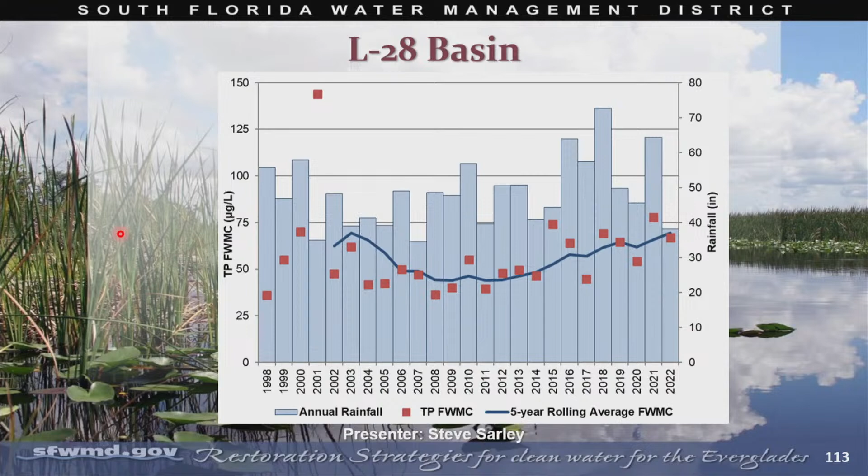All right, now we're going to move to populated Broward County. Suburban Broward County, C11 West Basin, located pretty much west of Fort Lauderdale. It's bordered on the west by water conservation areas, and the C11 West Basin includes several water control districts, including South Broward Drainage District, Central Broward Drainage District, and North New River Drainage Water Control District.

ERPs issued to these water control districts include, once again, conditions for best management practices, as well as optimized detention of runoff and water quality monitoring, especially with South Broward Drainage District. They have very specific requirements in their ERP for optimizing detention prior to discharge into the C11 West Canal. Discharges from the C11 West Canal occur through the S9 and S9A structures.

And this basin includes the CERP project, the Broward County Water Preserve Area. This project consists of 2 impoundments, a wetland buffer, intended to reduce discharges from the basin while maintaining flood control.

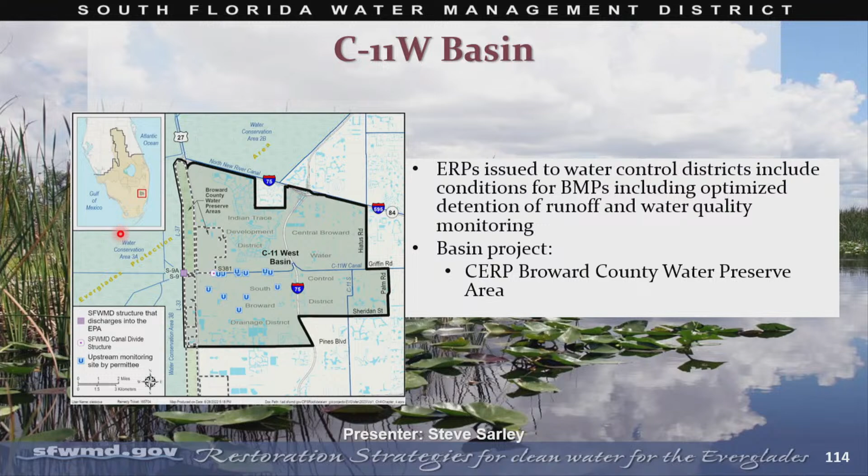Looking at this figure, C11 West Basin historically has had pretty darn good water quality. Over the period of record, flow weighted mean concentrations have varied from about 12 or 13 parts per billion to about 30 parts per billion. We see in water year 2022, we were about right in there with, looks like, about 13 parts per billion of phosphorus concentration as measured at the S9 and S9A structures.

Finally, I want to talk about North Springs Improvement District Basin, NSID Basin. The NSID basin, once again, is a basin in populated Broward County. Actually, the northwest corner of populated Broward County. The Hillsborough Canal borders this basin in the north, running diagonally here. This basin includes the cities of Parkland, portions of Coral Springs, mostly residential, commercial, kind of typical suburban situation.

Environmental resource permits issued to NSID include conditions requiring BMP implementation, as well as water quality monitoring. And also, very critically, NSID's ERP includes phosphorus load limits for discharge to Water Conservation Area 2A, if and when it does occur. And we'll see here shortly that it does not occur very often.

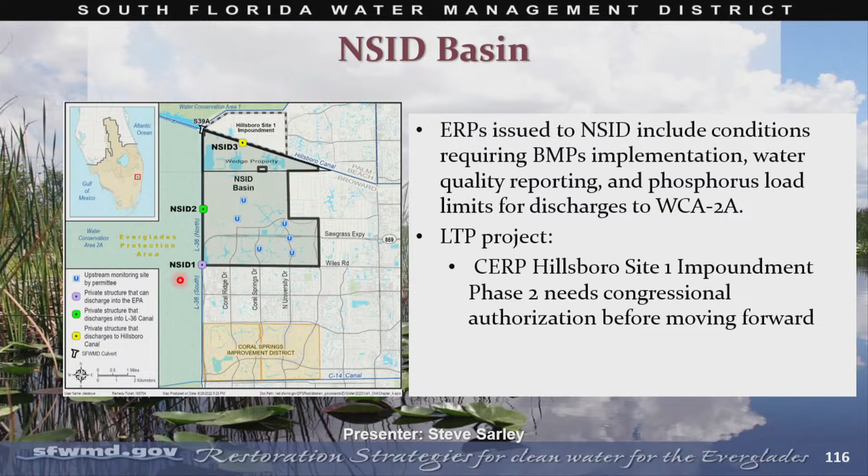So only when NSID discharges through NSID 1 to the conservation area do those discharges end up in the Everglades system. We've worked with NSID a lot over the years in trying to eliminate this occurrence. And we see here that we've been pretty successful in doing that, working with them.

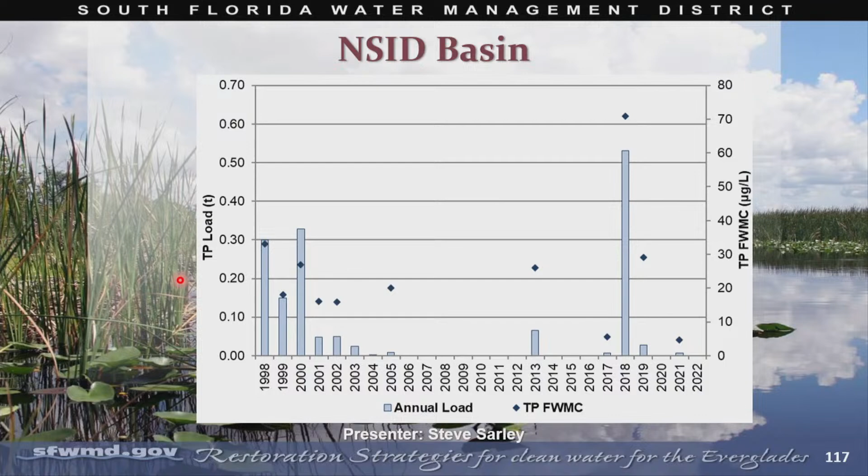But even then, you can see that as far as magnitude goes, we're looking at barely over a half a ton of discharge. And since 2018, we had a little blip in 2019, an even smaller blip in 2021, and nothing in water year 2022 as far as discharge into the Everglades system. But once again, the basin has the potential. So those are the 5 basins that I wanted to cover today as far as other tributary basins.

And I'm going to go ahead and summarize what Youchao and I have covered today. So Youchao, as he covered, the EAA basin, water year 2022, experienced a TP load reduction of 66%. With the water year 2022 results, the 27-year average annual TP load reduction for our program stands at 57%.

For the C139 basin, water year 2022 remained in compliance. The measured runoff was below the target phosphorus level for TP load. Prior water year, we were a little above. Water year 2022, we got back down below. So we're in good shape there.

As far as the other tributary basins that I covered during water year 2022, we have the voluntary and required BMP implementation based on environmental resource permits and agreements with the various water control districts, and have experienced some progress toward the completion of CERP projects, as well as WERP.

Continued success and ongoing improvements to our source control program do rely on verification of BMP implementations, as well as continuing meaningful research and tracking program performance based on water quality data and basin-specific metrics. And Chapter 4 of the South Florida Environmental Report covers our program, Nutrient Source Control Program in the Southern Everglades. And thank you.

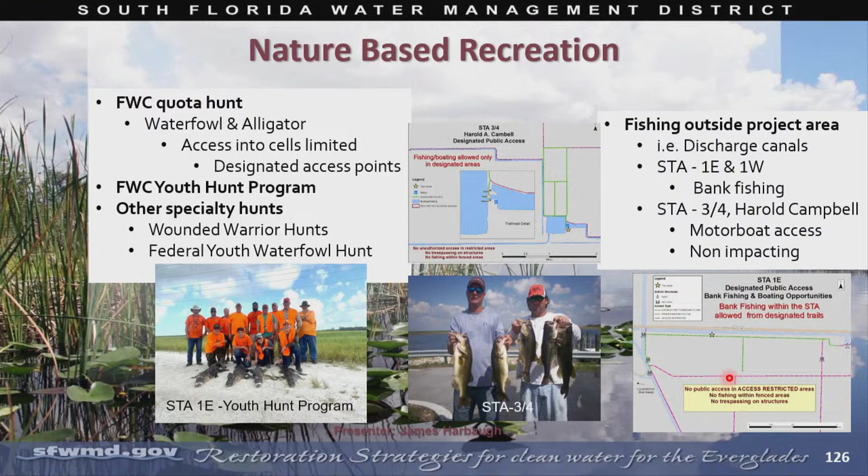Over at STA 1 East and 1 West, we do have public use areas along the northern side of the property on the levees. We have a trailhead, for instance here, this is STA 1 East, outside of the project area on the north side, and individuals can access the levee and fish both of the distribution cells from the levee, with guidance not to go down beyond these areas to fish. And then it does connect over through the Loxahatchee to STA 1 West, and between the two properties is about 6 miles of levee that is accessible for fishing. Hiking is allowed there as well, but quite a few people use this property for fishing.

A little bit of a focus on the function versus public use.

These are working properties. They're engineered restoration, and I wanted to point out that a lot of times the public has a misunderstanding that when we're talking about a restoration, this is not a restoration to pre-civilization times. We have areas that are altered, and we're using these areas to clean up the water with the most bang for the buck, considering the size of the properties and how much water is pushing through them.

So we have to remember that the focus on this, the eyes on the prize, is that it's for water quality. And with that, there's a lot of people that we have to work with in order to allow access into these areas. The projects going on inside of here are many. The veg management team is one that I deal with on a regular basis. I've mentioned already cross flow versus parallel flow.

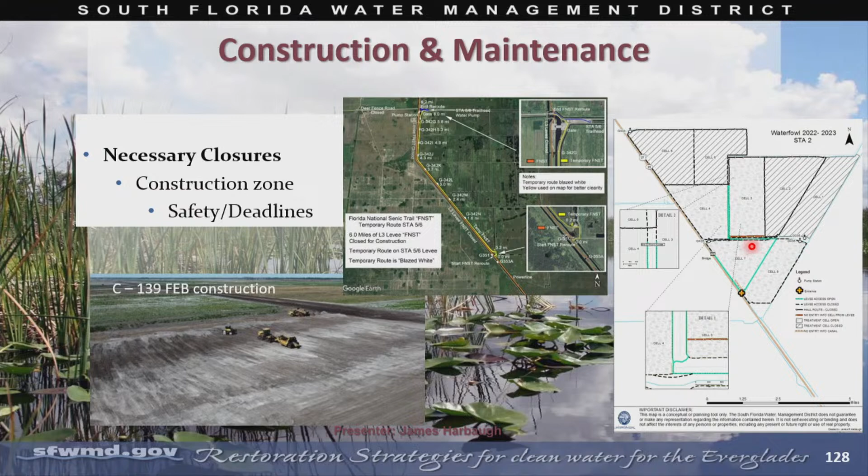Moving forward, new STAs coming into play, the A2. We have the expansion over at 1 West, the second expansion. All these things have recreation in mind. This is basically a timeline from the beginning, the conceptual point of, we're going to do this in this area, and then we introduce the recreational standards into the design phase. And then once that is all approved, you implement the construction and then go forward.

The construction is completed. So just between these 2 points here is a great amount of time. Things sometimes got changed between here and there. So while we're doing some of the testing and the finalizations of the STA construction, recreation is reconsidered again. Now we kind of do the finishing touches on it, if you will.

What do we want to have? Where do we want to have it specifically? What type of structures do we want to have? Where the gate's going to be? Where the access point's going to be, et cetera. So I think of it as a finishing construction. You are putting up the molding now. And then we continue with more staff.

We get input from the public. I could tell you long before we get to this phase here, the public has already got a lot of interest in this. When they hear that something's going to be built, they start giving us input immediately. So we continue with the public input, and we look for what they want and how we can accommodate it if we can. And if we can accommodate it, we try to make it happen.

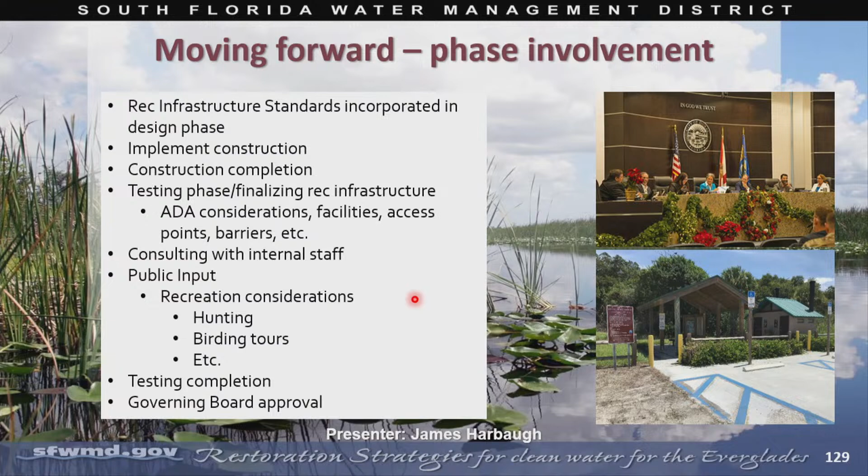Which brings me to public participation. We have quarterly rec forums where we get together the recreational groups and the stakeholders, not just for the STAs, but overall. We also have campgrounds and so forth, so we cover a huge gamut of topics. But the STAs seem to be foremost a lot of times, especially with the hunting.

And then if we have a property where we do have the access, we work with FWC and the rulemaking process, like for instance, the points where we're going in off of a levee at a specific point into the cells in the project area. That's regulated by FWC. And in order to make these types of changes, if the public has something that doesn't make any sense, which oftentimes does happen because rules don't make sense the same way in the project areas as they do in other properties, this is the place where this has to be done.

It's the rule change that happens annually. There's a process that goes with it, and the best way for the public to get involved with this is to attend the rec forum meetings internally with us, and also to have input with the FWC. And with that, that is my contact information.